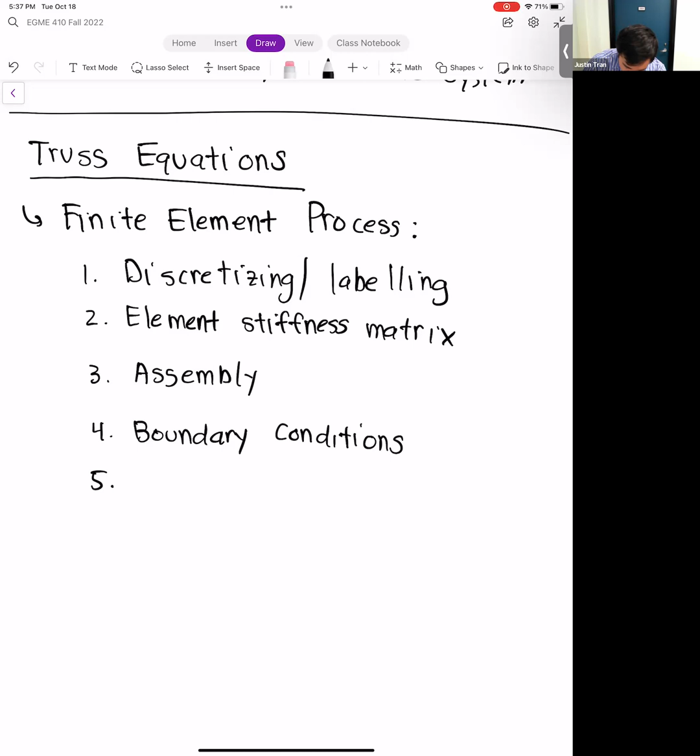Finally, step 5 is we solve. Step 5 is actually the easiest part of this entire journey because you don't actually do it yourself. All you have to do is basically set up the problem — you get the global stiffness matrix, you get the global forcing vector, you feed them into MATLAB, and you let MATLAB do all the hard work for you. MATLAB is going to give you an answer for all the nodal solutions.

Even though we're talking about trusses here, we're still going to be following the same process. The only difference is that in step 2, we're going to be forming the element stiffness matrix for a truss instead of a spring. That's kind of the big difference between most finite element methodologies — how you form the element stiffness matrix based on the type of elements that are available.

Let's go ahead and introduce trusses. A truss is a slender structural element that we assume can only be compressed or stretched.

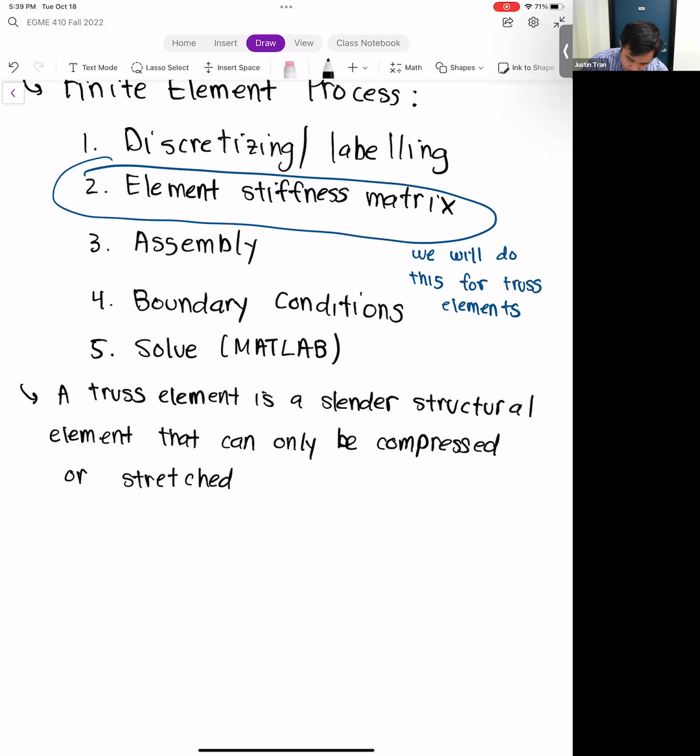And so visually, we kind of represent it as just a thin tube, like this. So this tube here is of length L.

We also know the material for this truss element, and so we also know its Young's modulus, E.

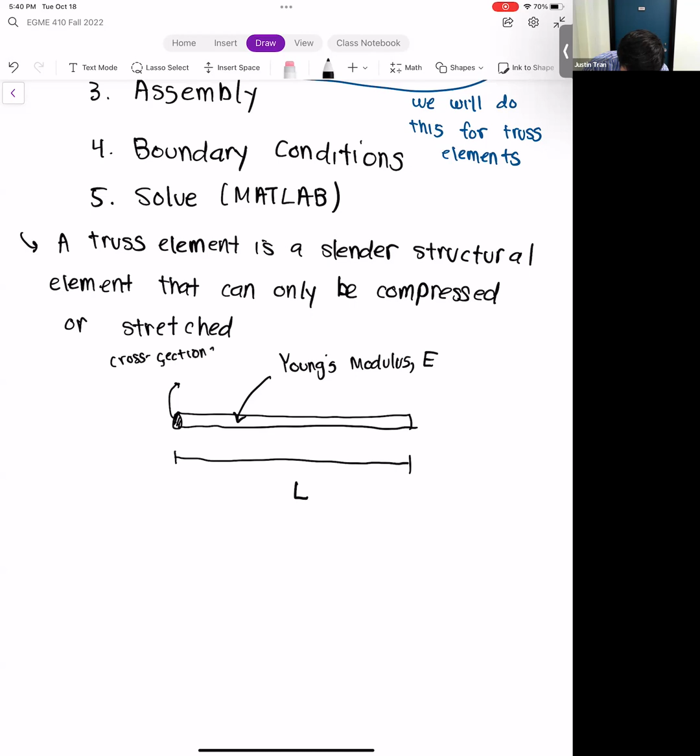And then one thing we'll also know is the cross-sectional area, where the cross-sectional area is A. So those are the three main properties for the truss that we're going to be working with.

And our assumption here has to do with its modes of deformation. We're only going to assume that it can be compressed and stretched. That means the deformation is going to be purely in the axial direction of the truss.

And so when we're characterizing the deformation D1, D2, we're only going to assume that it's down the length of the element. It's either going to be stretching it out or compressing.

I'll go ahead and label these nodes. The node on the left I'll call node 1, and the node on the right I'll call node 2. In addition to the deformation, we also have the forces that are on each node. We'll call that F1, F2. So I'm going to go ahead and write that down.

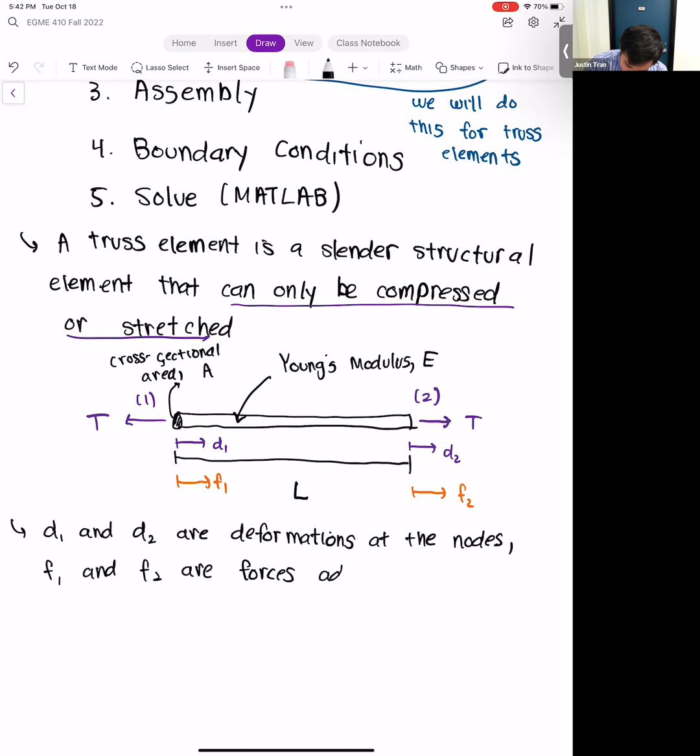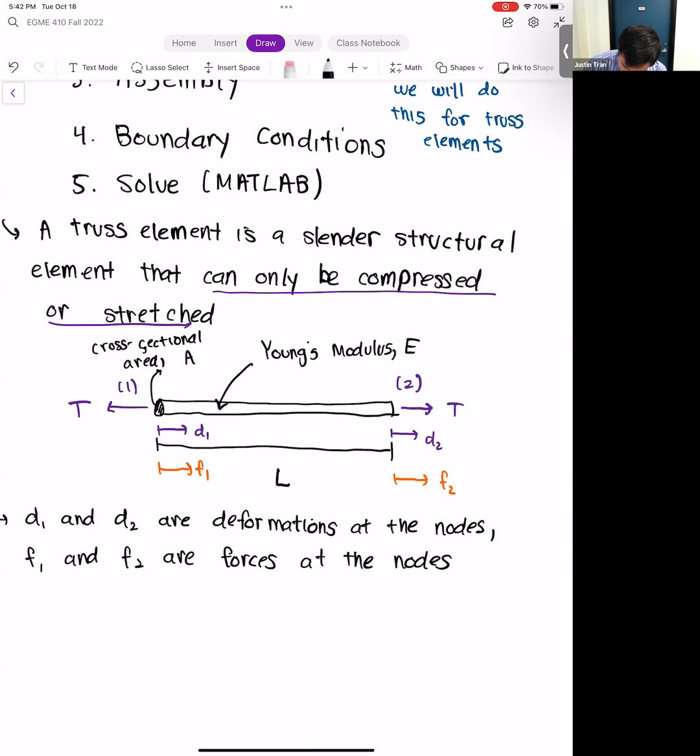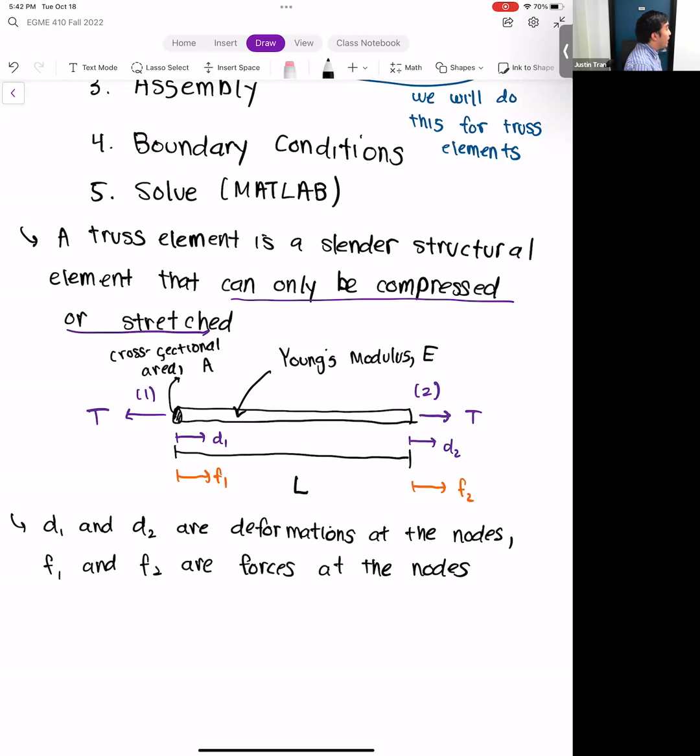We have D1, D2, F1, F2. I drew T in there - I was a little bit premature with that, and we're going to use T in a second. But basically, what we want is a relationship between D1, D2, and F1, F2. And that relationship is going to be our element stiffness matrix.

And so that's basically what we're going to seek to obtain. So, this first part of the class is we're going to obtain the element stiffness matrix for this truss, and then we're going to use that element stiffness matrix in problems. That's kind of the general trend of what we're going to be following over the next couple of weeks.

So, over the next couple of weeks I'm going to be introducing different types of elements. And then from those elements, we're going to form its element stiffness matrix, derive it in some way. And then from the element stiffness matrix, we can then use that to do problems and such.

So this truss element here will be the second type of element that we'll go over in this direct stiffness section. Any questions on this so far?

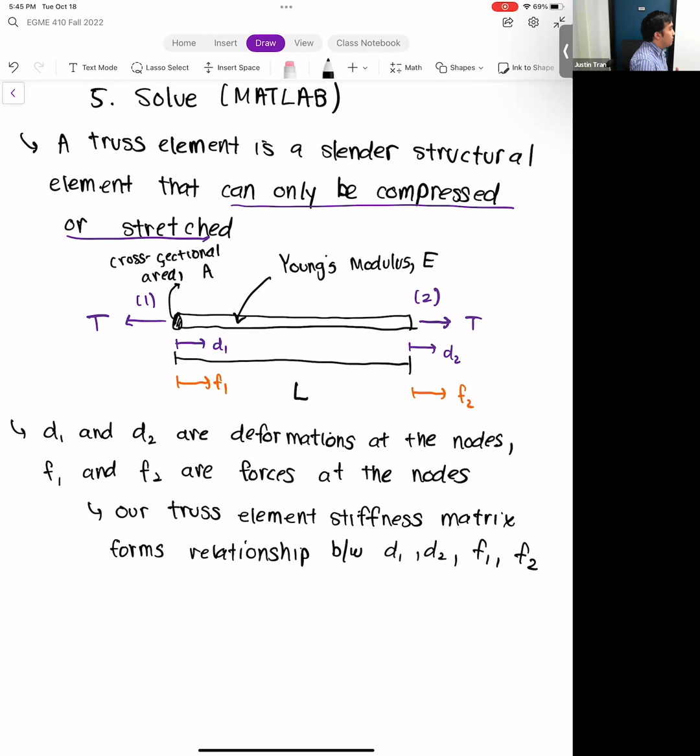So what you should generally expect as we go through this derivation is that the element stiffness matrix for this truss should look very similar to our spring, except we don't have a spring constant - instead we have these other quantities, but you'll see it all kind of make sense. And so just like we did with the spring, we're going to assume that this truss element is in static equilibrium.

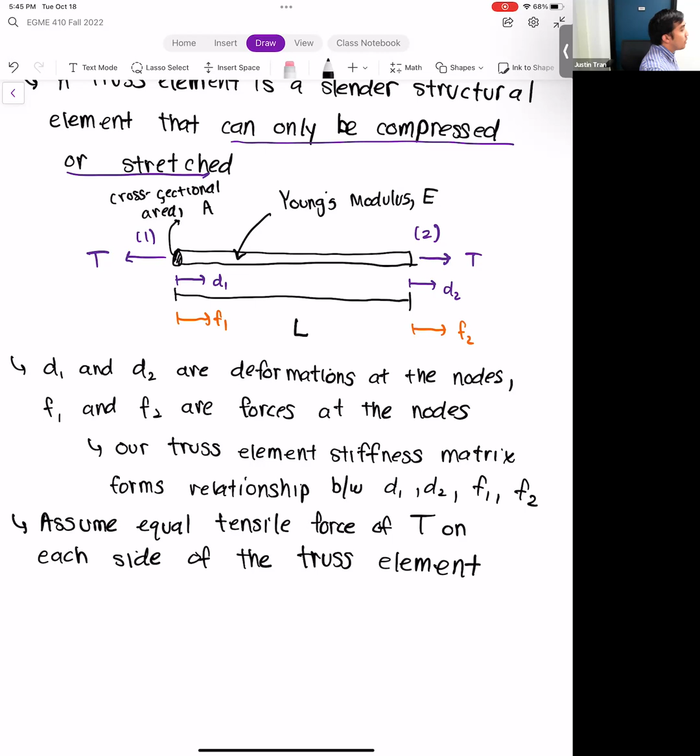And so we're going to assume that we have an equal force of T, a tensile force of T applied on both sides of the truss. We're going to use that to form our relationship between F1, D1, and F2, D2.

So another thing we're going to assume is that we have linear elasticity inside the bar. And so what we know from linear elasticity is that stress is linearly related to strain - this is Hooke's law. So we have stress equals E times strain, where E here is our Young's modulus and epsilon here is our strain. This equation is going to form the basis for our derivation of the element stiffness matrix, because what we're going to do is substitute for each of the terms here, except for E, and put them in terms of the quantities that we know.

Okay, so let's start with sigma. We know that sigma is stress, where stress is nothing more than just a force distributed over an area.

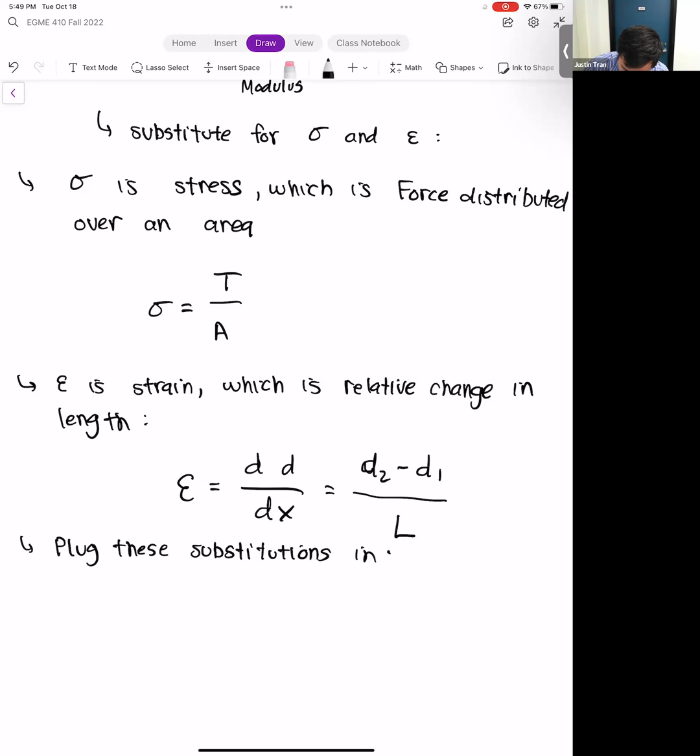On the left-hand side, we have sigma, which is T over A. This is equal to E, the Young's modulus, multiplied by our strain, which is d2 minus d1 divided by L. So all I did was plug in our expressions for sigma and epsilon into our equation there.

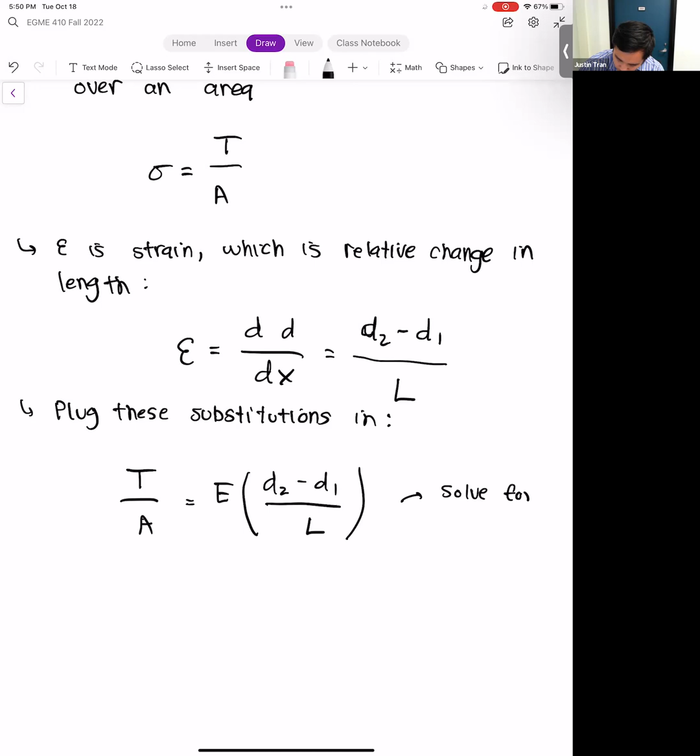And so I'm going to go ahead and simplify this, solving for T. I'm going to isolate T on the left-hand side by multiplying both sides by A. So we have T is equal to A times E divided by L, times D2 minus D1.

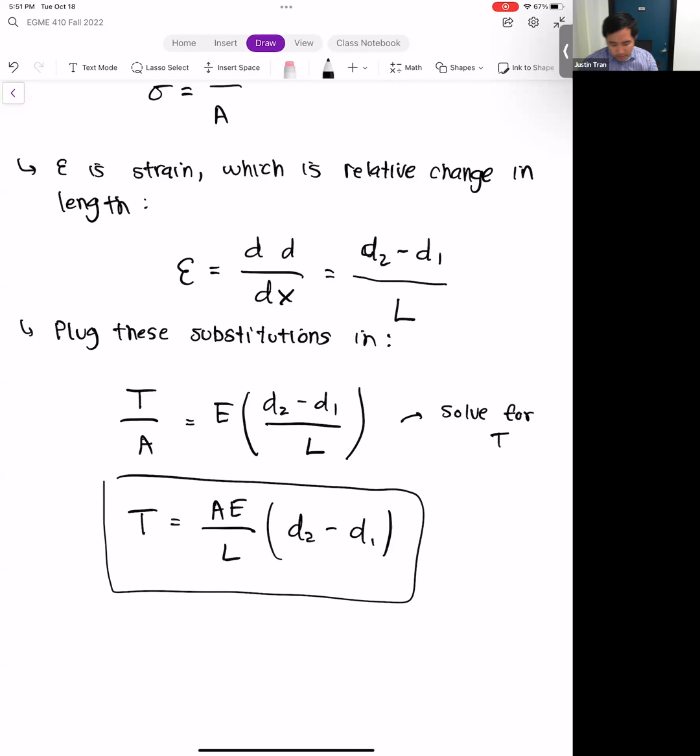So now that we have an expression for T, we know that T here is being applied on both ends of the truss. So let's go ahead and mathematically relate T to F1 and F2.

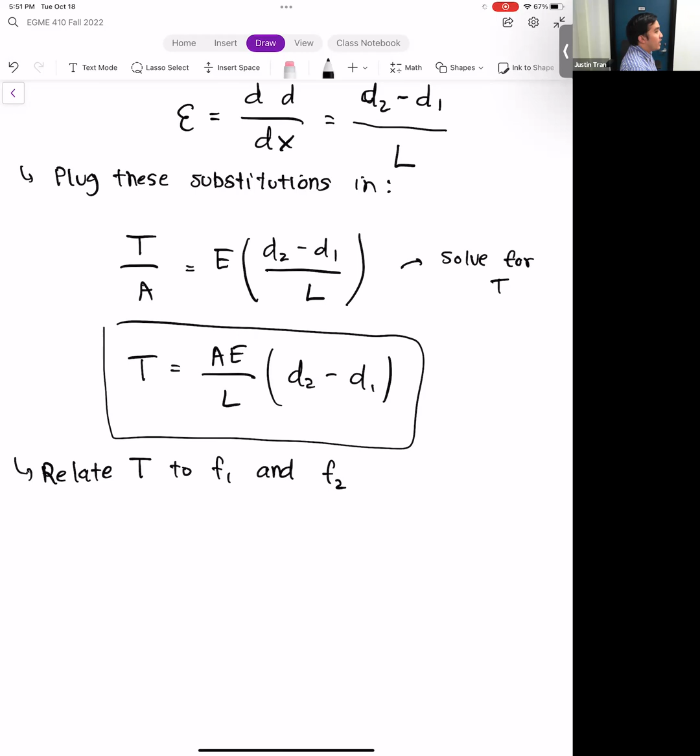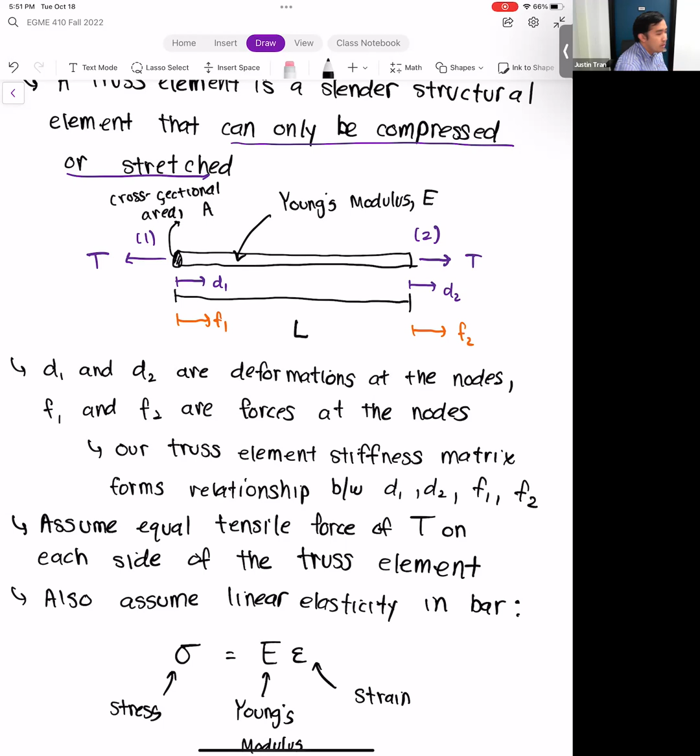All right, so let's go back up to our figure here. We can see that T is being applied to the left-hand side of F1. So T is going to the left on node 1, whereas T is going to the right on node 2. And so what we can do is say that F1 here is going to be equal to

negative T, because the force that's being applied on node 1 has a magnitude of T, but it's going to the left. Whereas the force that's being applied on node 2 is going to be exactly T, so F2 is going to be equal to T.

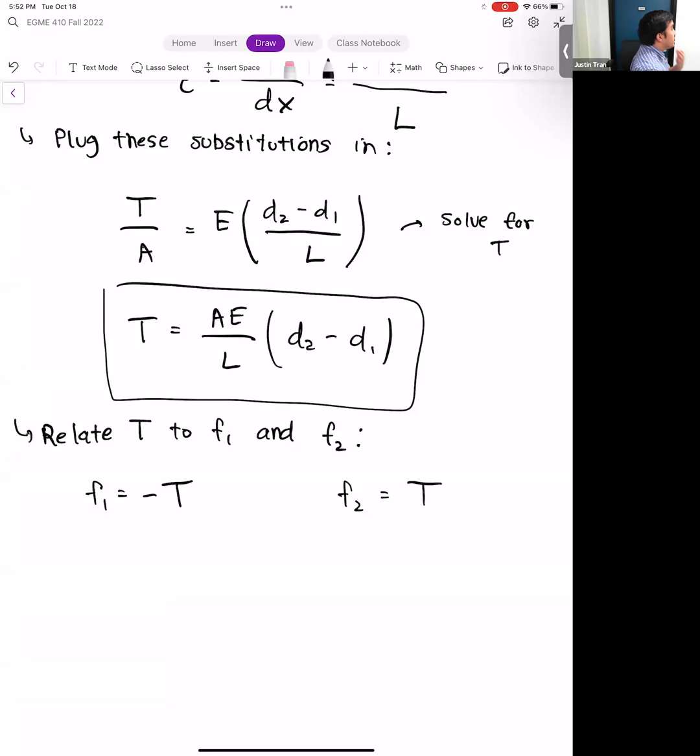So let's go ahead and plug in our expressions for this. We can say that F1 is equal to minus AE over L times D2 minus D1, and F2 is equal to positive AE over L times D2 minus D1. Just for simplicity, I'm going to distribute the negative for F1, and so we have AE over L times D1 minus D2.

For F2, there's nothing really to distribute, so I'm going to leave it as it is. And now that we have these expressions here, we can see that we have equations that have F1, F2, D1, and D2. So let's go ahead and use these two equations to form our stiffness system.

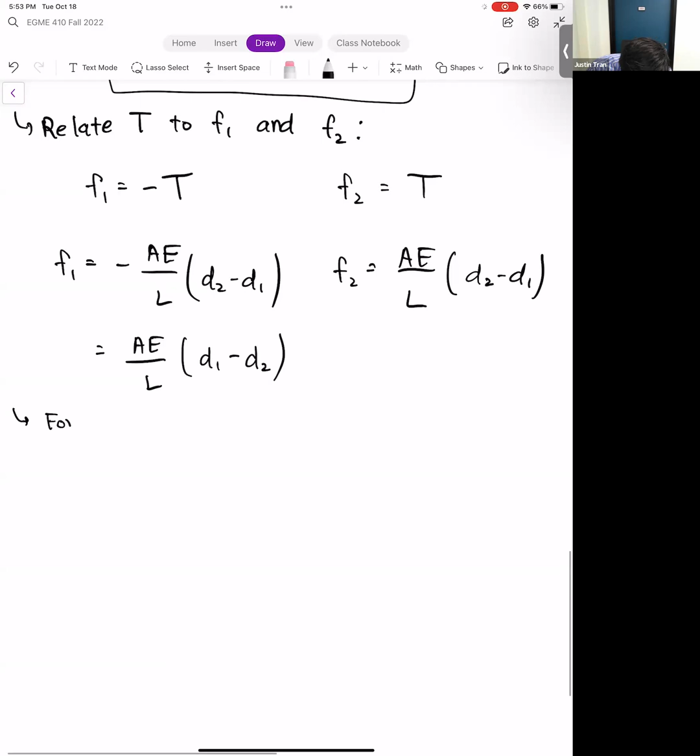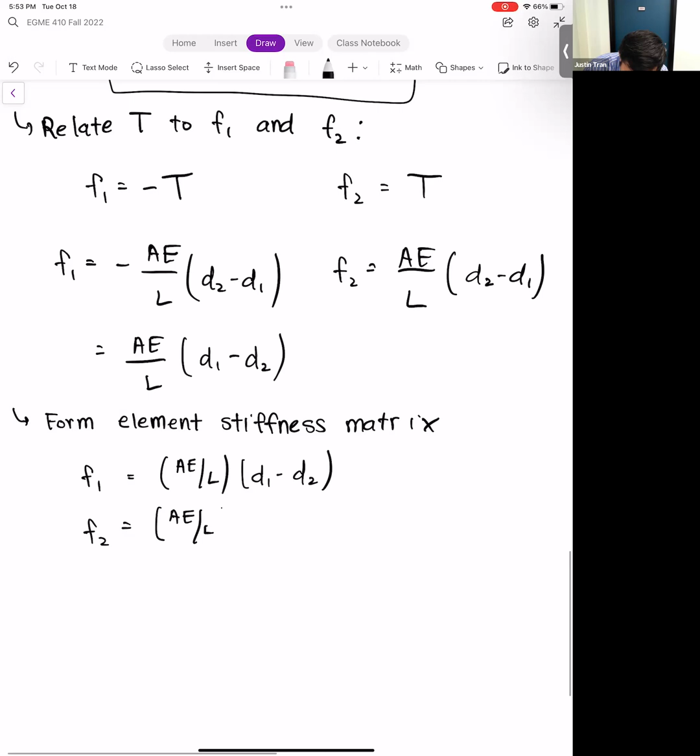So I'm going to say F1 is equal to AE over L times D1 minus D2, and F2 is equal to AE over L times D2 minus D1. Now let me go ahead and put this in matrix form, because what we have is a system of two linear equations and two unknowns.

And so of course we can put this in matrix form. We have F1, F2 is equal to the matrix AE over L, minus AE over L, minus AE over L, AE divided by L, times D1, D2.

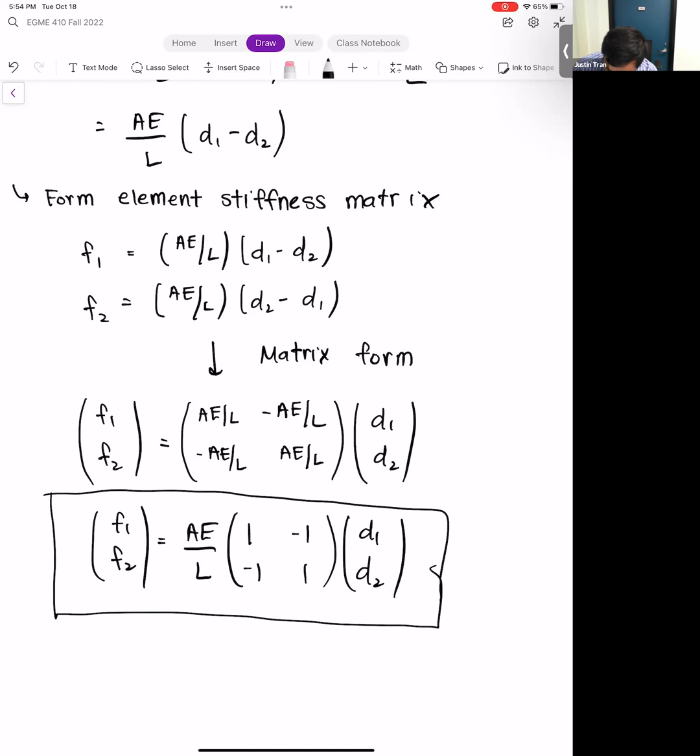We can factor out, just to save our fingers a little bit instead of having to write AE over L so many times, because it's a constant multiplier, we can pull that out of the matrix. So we can say this is equal to AE over L times the matrix 1, minus 1, minus 1, 1, times D1, D2. And there is our stiffness system.

Or this right here, that right there is our element stiffness matrix for a truss.

All right, and so that's it. Okay, and so there's our element stiffness matrix for a truss.

Now that we have that, we can go ahead and start solving problems. We've already gone over the entire direct stiffness system, and the only thing that was unknown to us up to this point was how to form the element stiffness matrix for a truss. But now that we have that, we're ready to start doing some problems.

So the next thing I'm going to do is an example. But before I do that, are there any questions on this? Okay, all right, so let's do an example.

In this example, we're going to have an assembly of 3 truss bars. The truss bars are sandwiched between two fixed walls.

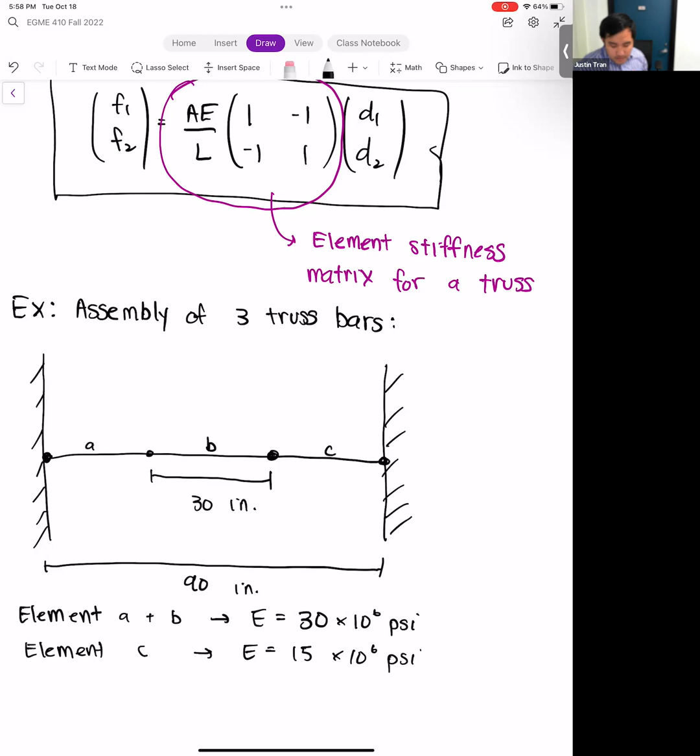We also know the cross-sectional area. For elements A and B, they have a cross-sectional area of 1 inch square. Meanwhile, element C has a cross-sectional area of 4 inch square. So even though element C here has half the Young's modulus, the cross-sectional area is quadruple - we have 4 times the area.

All right, so let me go ahead and label the nodes here. So we have nodes 1, 2, 3, and 4.

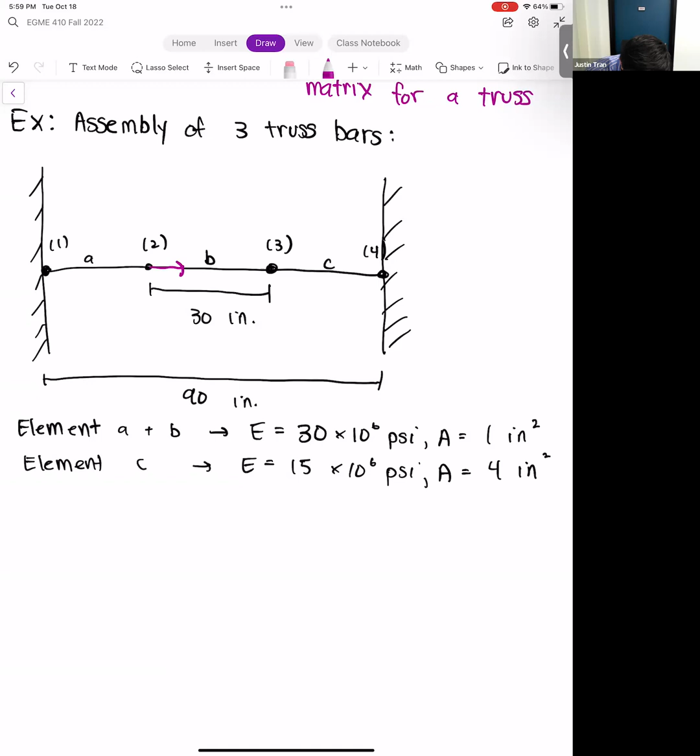And oh, we need a force too. So let's assume that we have somebody grabbing onto the middle of this assembly, and let's assume that we have a force here, and the force is equal to 3,000 pounds.

Before I forget, it may be clear from the figure, but let me just go ahead and label it just to be sure. Because nodes 1 and 4 here are kind of attached to the lateral walls, we're going to assume that nodes 1 and 4 are fixed.

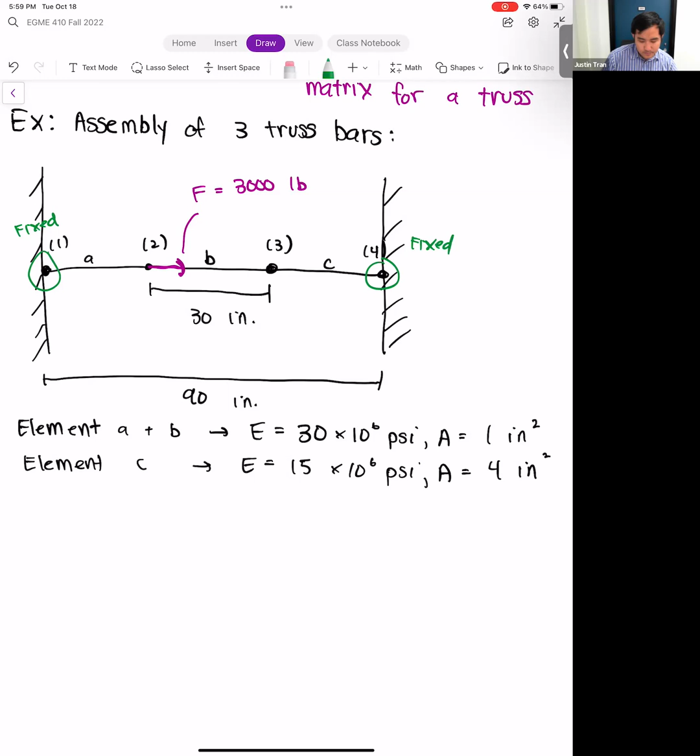Given this problem here, and all of its features, what we want to compute are the nodal displacements at each of the 4 nodes.

And one new thing that I'm going to show you how to compute in this problem too is we're going to compute the reaction forces at the 2 fixed supports.

All right, so we haven't gone over how to do part 2 of this problem, but we'll go over that once we get there. We need the nodal displacements first before we can actually do that. All right, any questions on the setup for the problem?

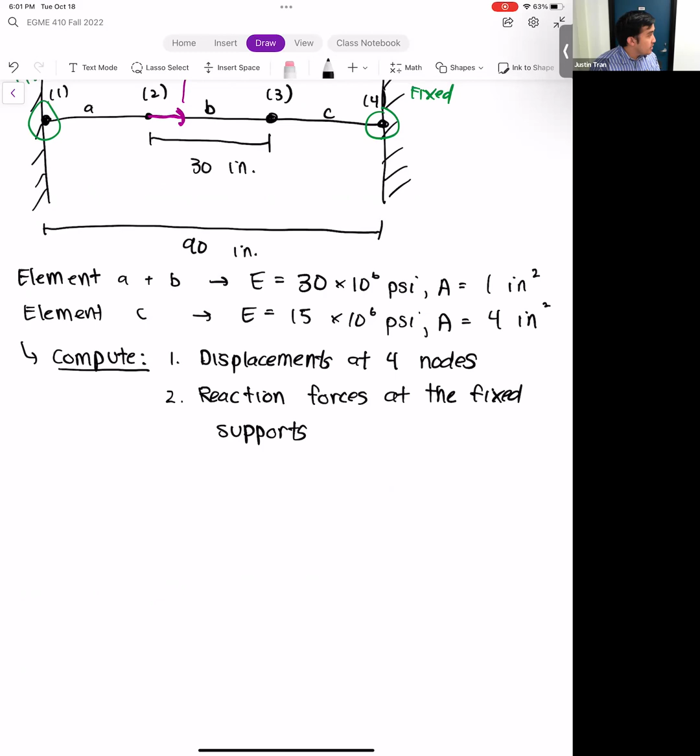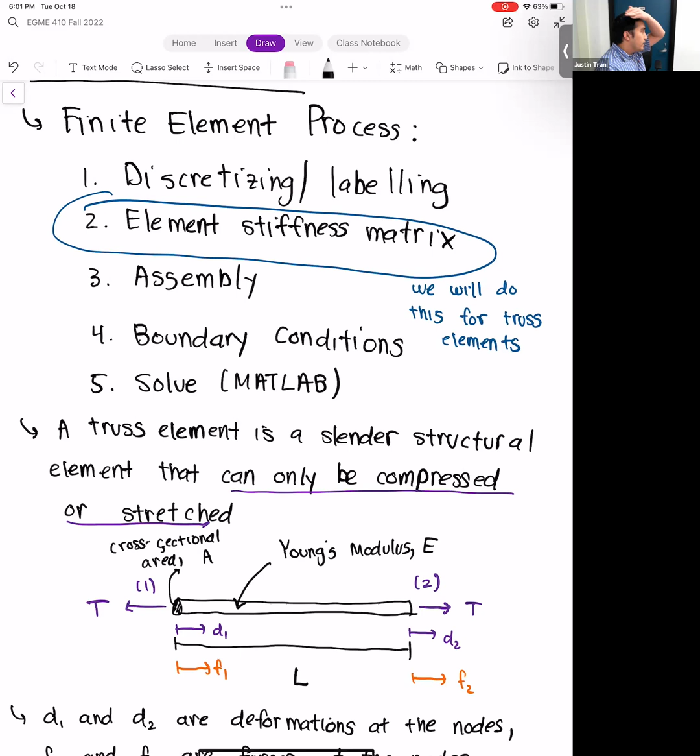We're going to be using the direct stiffness method to solve this, following this exact same recipe that we went over at the beginning. We've already discretized the system and labeled everything, so the next step is to do the element stiffness matrices for each of the elements.

We have 3 elements here, and so that means we're going to have 3 element stiffness matrices. We know for a truss, the element stiffness matrix is AE divided by L times 1 minus 1, minus 1 and 1. So for element A, if we go ahead and compute that, we have AE over L.

AE over L here is going to be 1 inch square, which is the area. E here is 30 times 10 to the 6 psi. And the length here is 30 inch.

So if we do the math here, we know the 30 here is going to cancel out. We know that the AE over L factor for element A is going to be 10 raised to the 6th power.

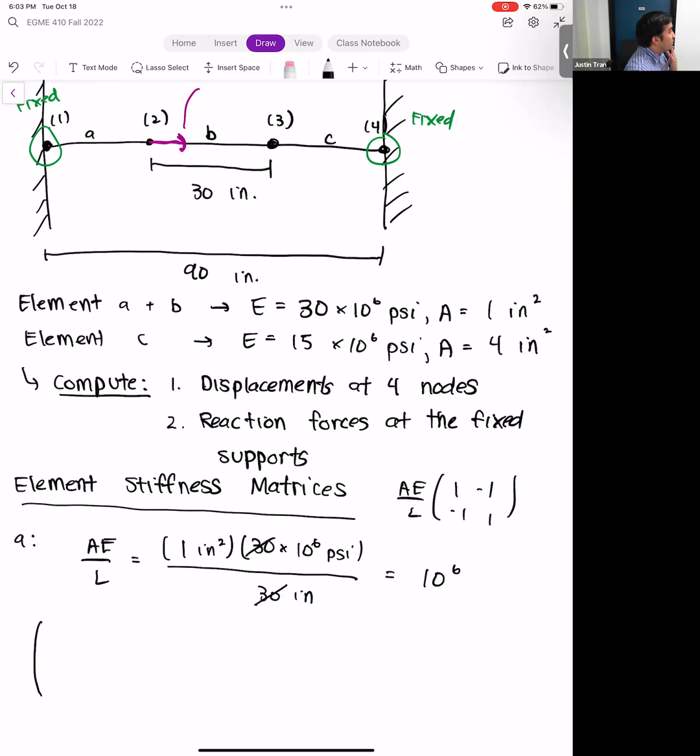So let's go ahead and plug that in. And remember, when you're forming the element stiffness matrices for the elements, you have to note on which node the elements are attached to. In this case, element A here is attached to nodes 1 and 2, so this is going to be F1, F2.

It's going to be multiplied by 10 to the 6th, 1 minus 1, minus 1, 1. And then we multiply it by the nodal displacements D1 and D2. So our total element stiffness system for element A is going to be F1, F2 equal to 10 to the 6th times 1 minus 1, minus 1, 1, multiplied by D1, D2.

Question? Yeah. Yeah, great question. So the units for this, PSI here is pounds per square inch.

The inch square is going to cancel out, and so the units for this is pound per inch. That's generally the units for the stiffness matrix, so it's going to be some force divided by a distance. Same units as a spring constant.

Okay, so that's element A. Let's go ahead and repeat the process for element B. Element B has identical AE over L, so I'm not going to write the formula for it again. For element B, we know that the AE over L is going to be 10 to the 6th pound per inch.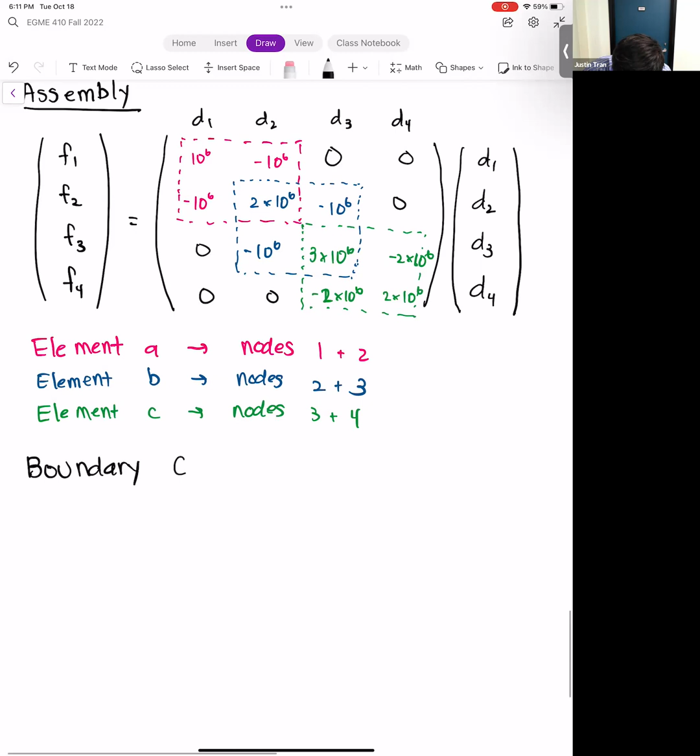Right, so remember boundary conditions, we're going to modify our assembled system in order to make it solvable. Because if you try to plug in that system right now into MATLAB, first of all, you don't have any values for F1 through F4, and so you can't solve it yet.

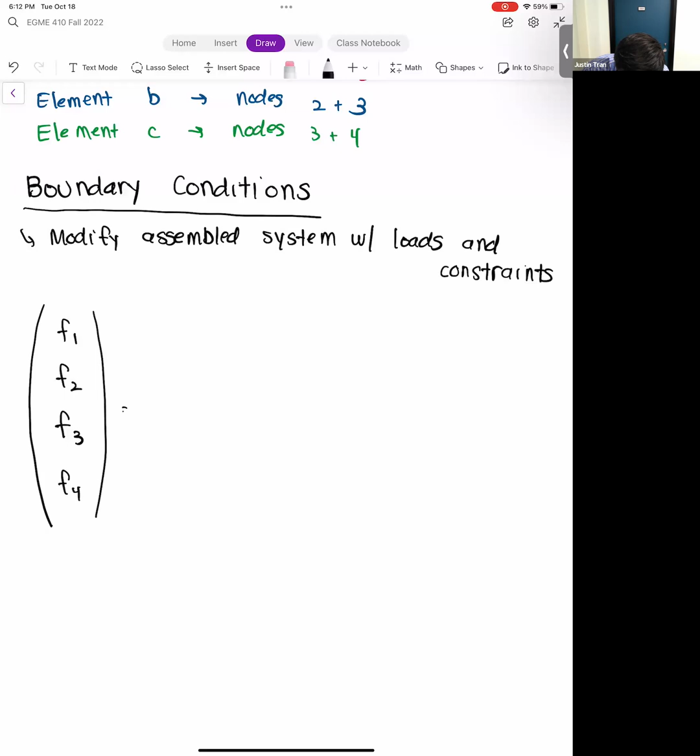So just for simplicity, I'm going to go ahead and write the system out again. So we have F1, F2, F3, F4, and D1, D2, D3, D4.

And then the entries in the matrix, we have 10 to the 6th, minus 10 to the 6th, minus 10 to the 6th, 2 times 10 to the 6th, minus 10 to the 6th, minus 10 to the 6th, 3 times 10 to the 6th, minus 2 times 10 to the 6th, minus 2 times 10 to the 6th, and 2 times 10 to the 6th. Everything else is zeros, but we're going to overwrite some of this anyway, so I'm just going to leave them blank for now.

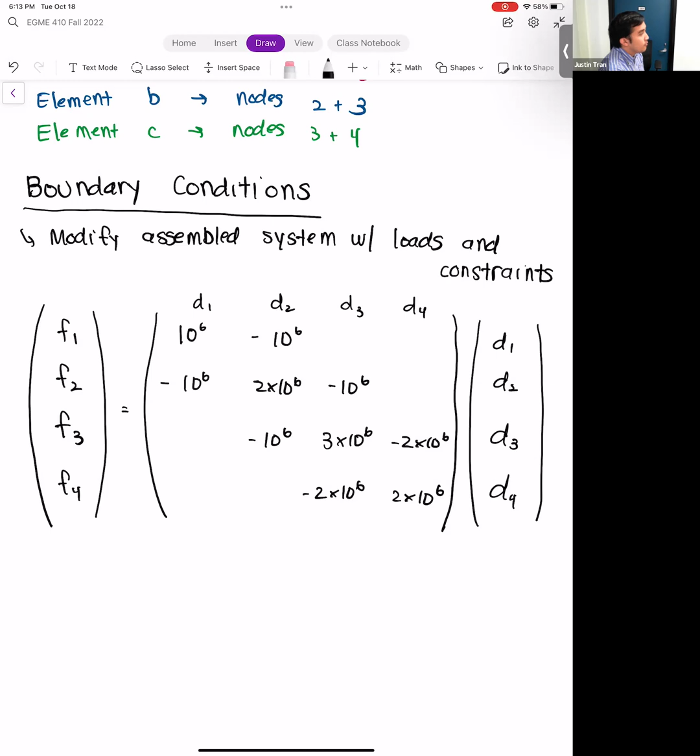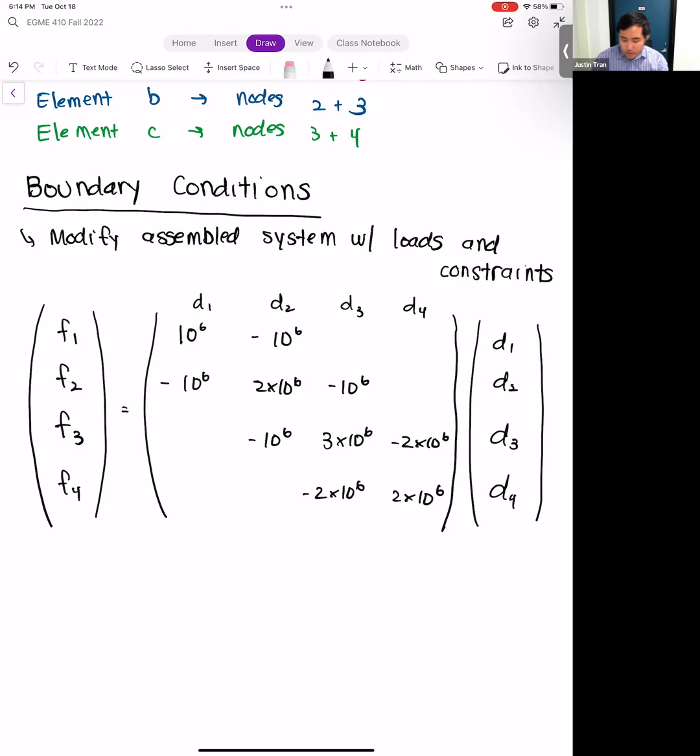Okay, and so we have 3 boundary conditions that we need to apply here. And so we have 2 fixed constraints. Those are fixed constraints on nodes 1 and 4, and we're going to apply those. We'll probably do those ones first.

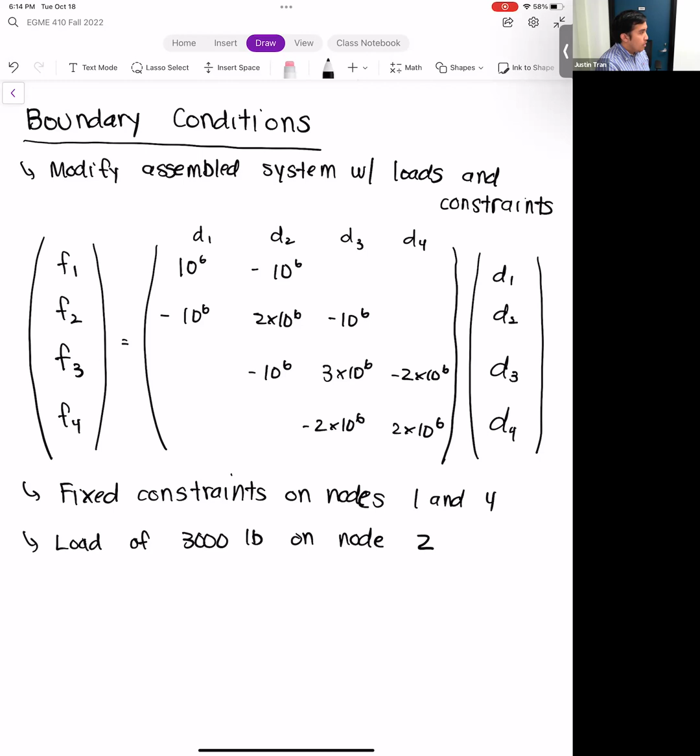Okay, and then we also have a load of 3,000 pounds, which is being applied on node 2. All right, so let's start with the constraints.

And so remember, the way that we deal with constraints is that we go to the rows on which the constraint is being applied, and we replace those entire rows.

So we're going to replace row 1 and row 4. Okay, and those are going to be our fixed constraints.

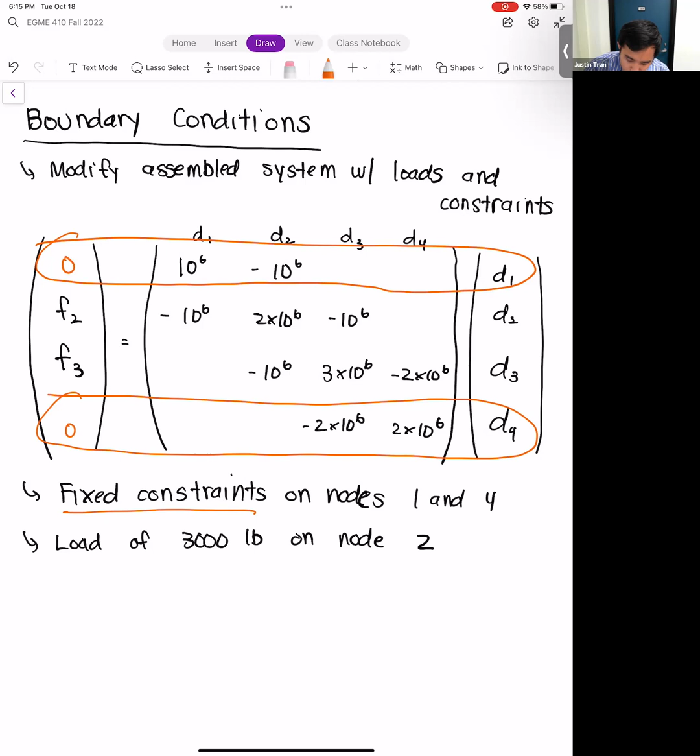And so if you recall, the way that we do this is that we set the forcing values in those rows equal to 0. We put a 1 on the diagonal entry, so whatever the diagonal is for that row, we're going to put a 1 there. And so for the first row, the diagonal entry is the first column, and for the 4th row, the diagonal entry is the 4th column.

And then everything else on that row is going to be zeros. So we have 1, 0, 0, 0 for the first row and 0, 0, 0, 1 for the last row.

Okay, and then the last thing that we need to do before we can solve this is replace F2, F3 with their appropriate load values. And so if we look back on the problem, F2, or the force that's being applied on node 2, is 3,000 pounds. So we're going to erase F2 here and replace it with 3,000.

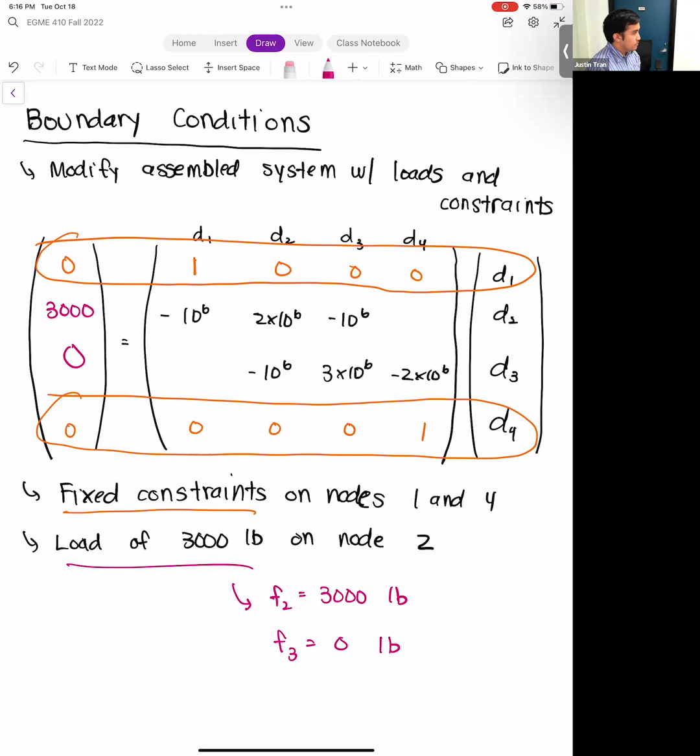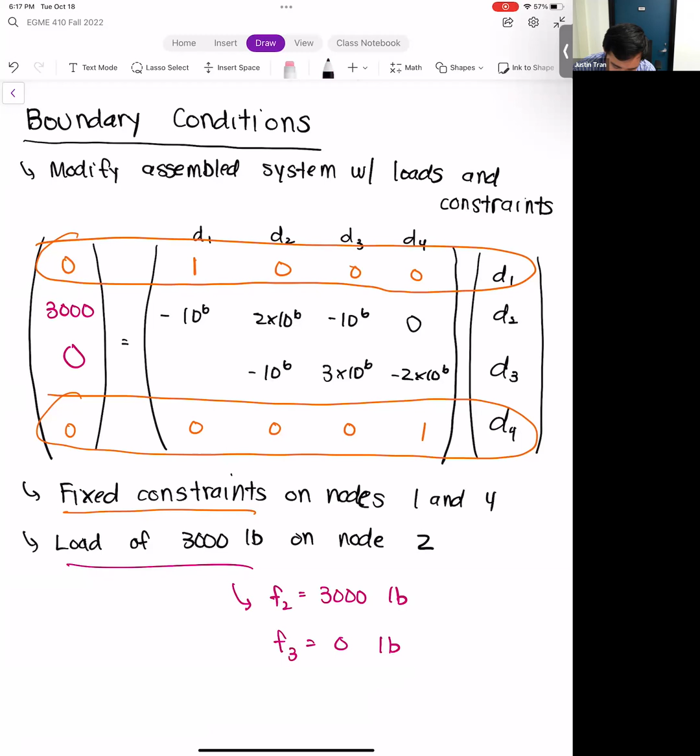And then we're going to erase F3 and replace F3 with 0, because there's no force being applied on node 3. So let me go ahead and fill in the rest of the zeros, we have a 0 here, a 0 here. Now this system here is ready for MATLAB because we've assembled our system and applied the boundary conditions.

And now we're ready to solve this in MATLAB.

So before we do that, are there any questions on how we apply the boundary conditions here?

Remember, the diagonal entry is just whichever column is matching that row number. For constraints, we put a 1 on that entry, whichever column matches that row number. So for row 1, that's column 1, and for row 4, it's column 4.

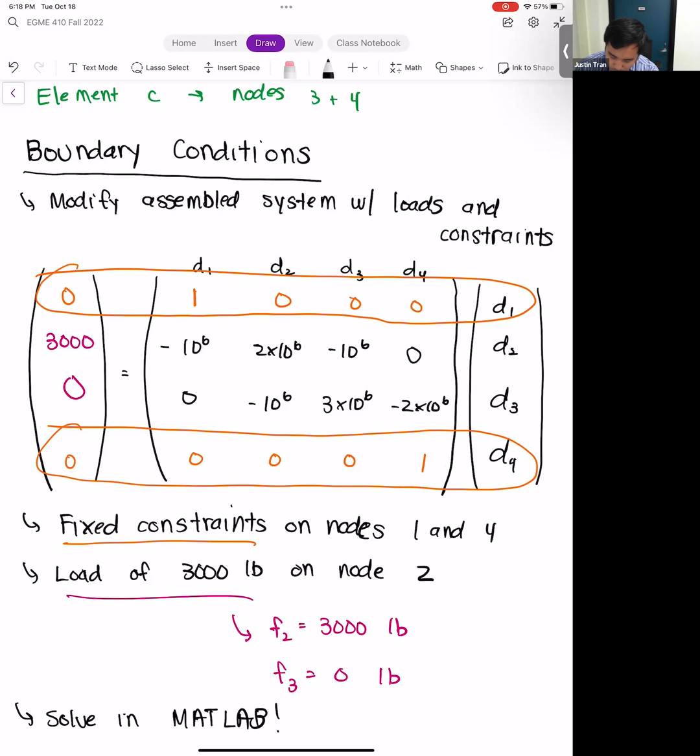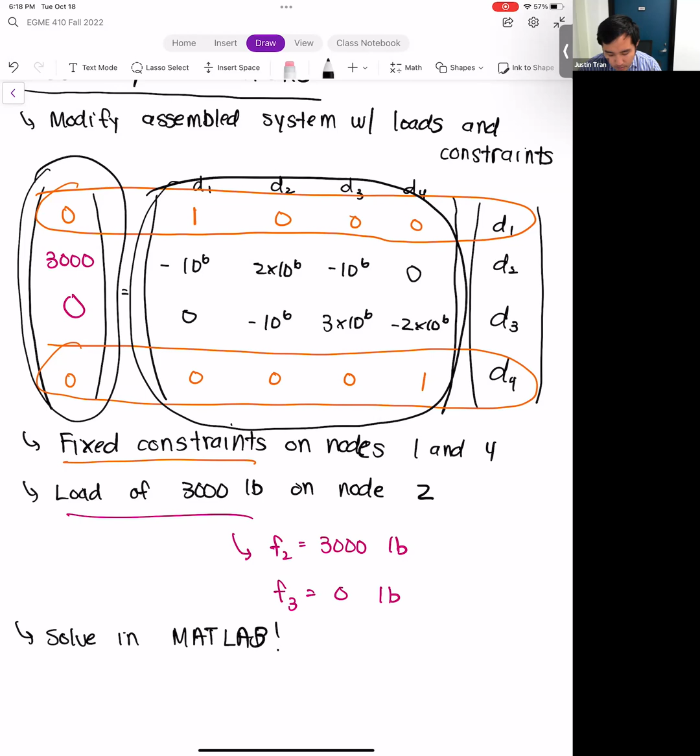Now that we have the system the way it is, let's plug it into MATLAB. I'll skip that step since I don't want to switch to my computer. Remember, we put this into MATLAB by defining two variables: the first is our stiffness matrix, a 4x4 matrix where the entries are given by the following, and the second is the forcing vector, which is all of these. If we use the magical backslash, then we get the following.

D1 is equal to 0 inches. D2 is 0.0018 inches. D3 here is 0.0006 inches. And D4 here is 0 inches.

So that's our solution. We've gone through the whole process again of the direct stiffness method, except now we've done it with trusses, and not much has really changed. The only thing that changed is that instead of our element stiffness matrix being comprised of spring constants, we have the truss parameters: the area, the Young's modulus, and the length of the element.

Any questions on this example here? Okay, and so that's part 1 of the problem.

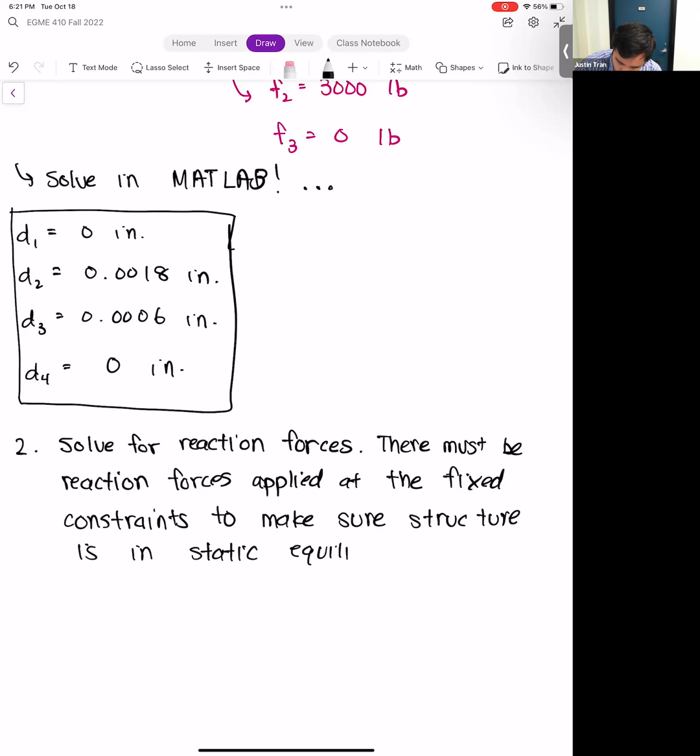Right, because the only finite element situations we've seen so far all involve static situations. Whenever you have a force like we have here of 3,000 pounds being applied on a structure, there must be equal and opposite forces being applied by the constraints to make sure the structure doesn't go into rigid deformation. This means that everywhere we have a fixed support, there has to also be a reaction force at those places. For this particular problem, our fixed supports are located on nodes 1 and 4, so we should solve for F1 and F4 that'll keep this structure in static equilibrium.

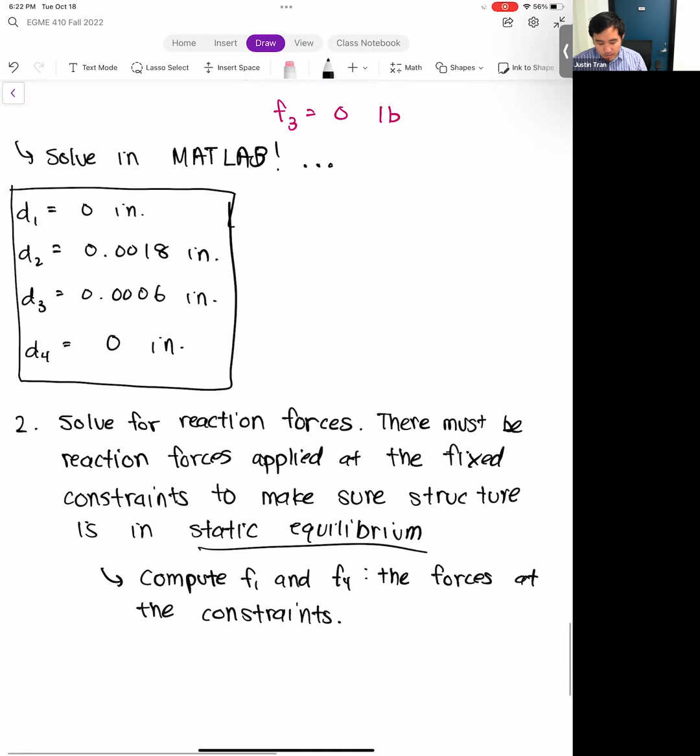And so to do this, it's actually simpler than you think. We don't have to do any free body diagrams or anything like that. What we can actually do is utilize the solution that we already have and a global stiffness matrix that we've already computed.

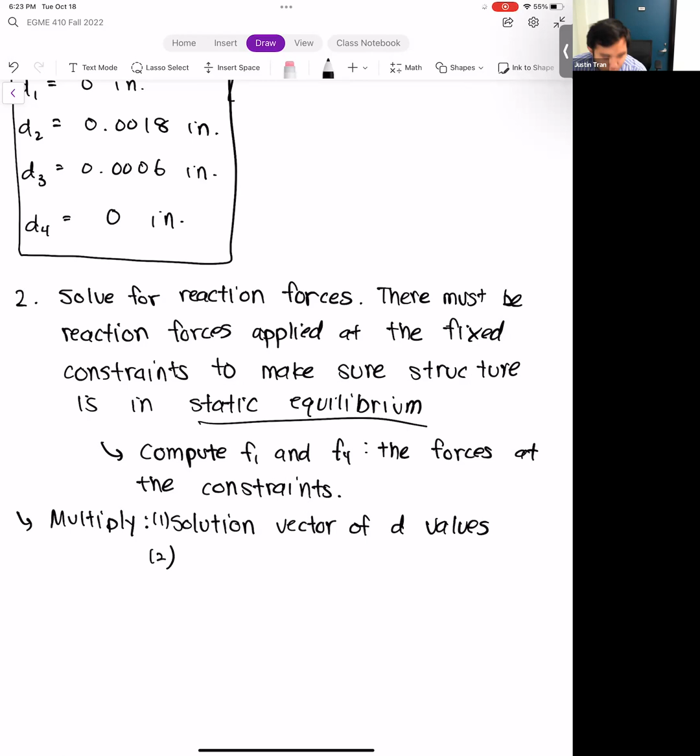All you have to do is multiply two things together: one is a matrix and the other is a vector. The first thing you're going to multiply is the solution vector that you just solved for—the values for D1, D2, D3, and D4, which we just solved for.

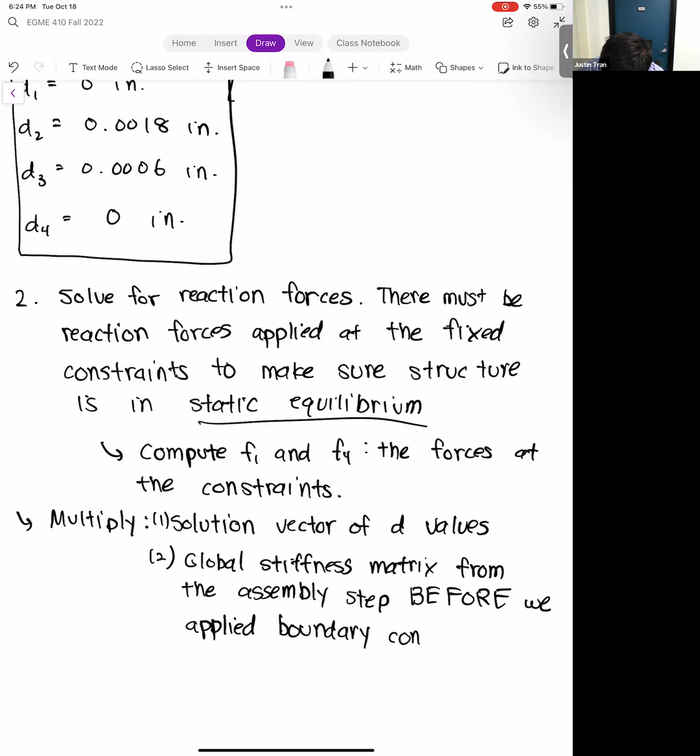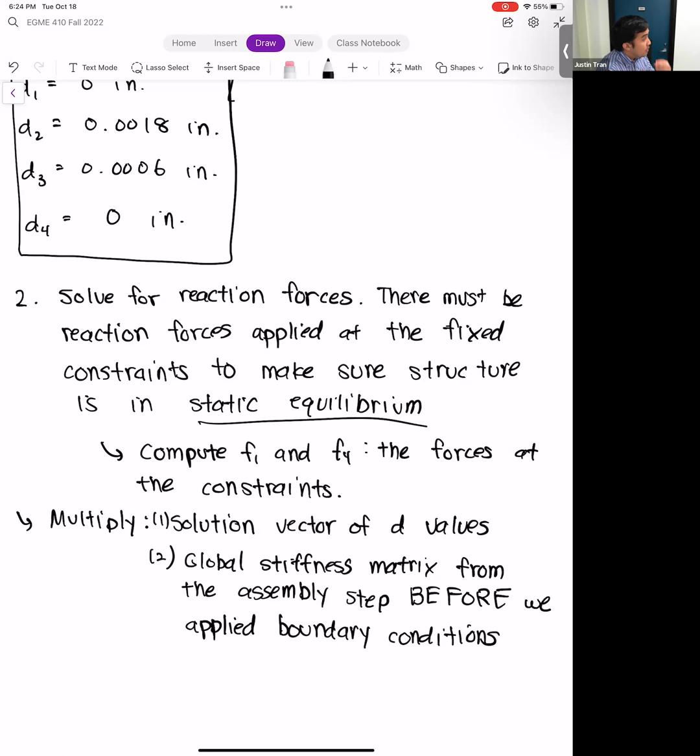The other thing you're going to multiply is the global stiffness matrix from the assembly step. This is pretty crucial—this is going to be before we apply the boundary conditions. If you remember, when going through our direct stiffness process, we had a global stiffness system where after we assembled all the element stiffness matrices, we then modified that system according to the boundary conditions. So what you want is that global stiffness matrix before you apply the boundary conditions, and you're going to multiply those two things.

If you look back into your notes, this is the global stiffness system we had before we applied boundary conditions. Notice that it's symmetric, so you should get a symmetric system here.

And then what we're going to do is we're going to multiply this by our solution. If we look back up here, our solution is the following: for D2, we had 0.0018, for D3 we had 0.0006, and D4 is 0.

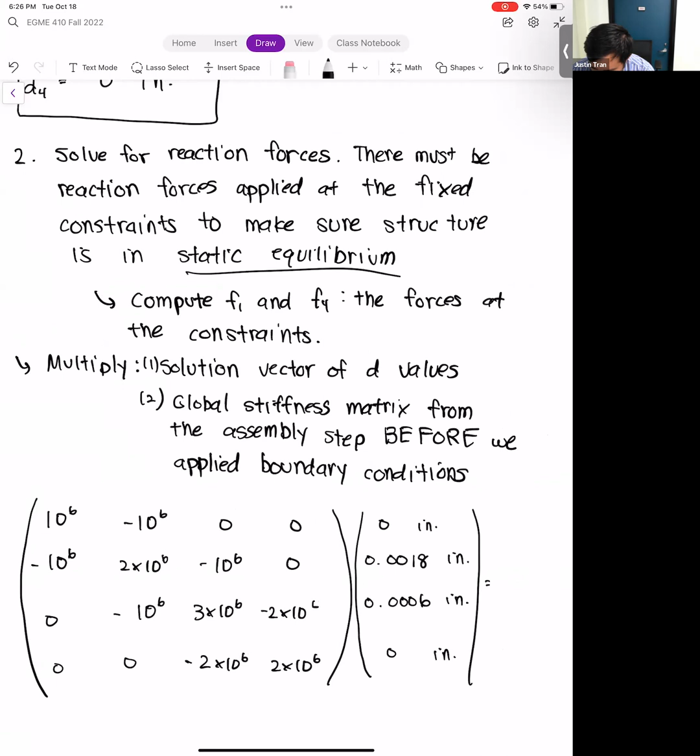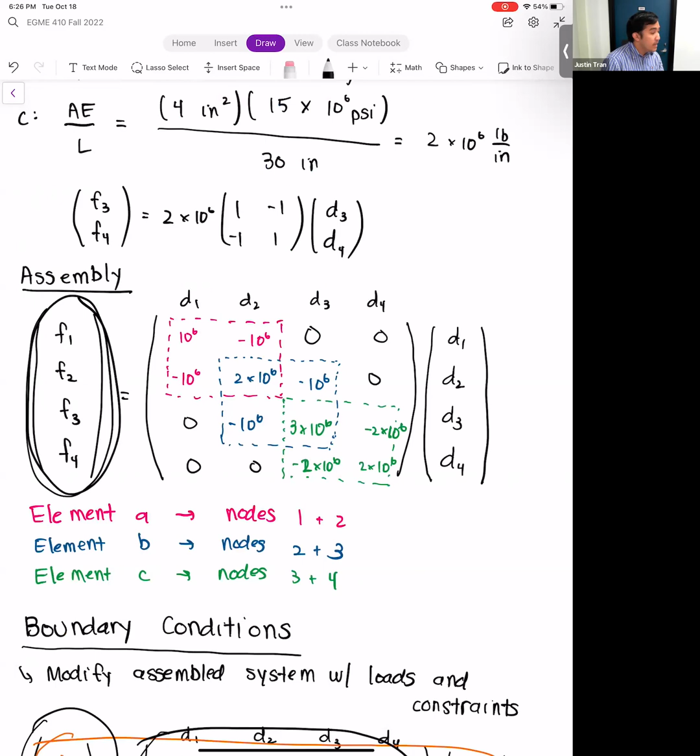All right, so why are we doing this? If you go back to our stiffness system before we apply the boundary conditions, you can see that these things are exactly F1, F2, F3, and F4. And since we've already solved for D1 through D4, all we have to do is go back to that system, and this can give us F1, F2, F3, and F4.

All we have to do here is perform the matrix vector multiplication. Of course you're welcome to do this by hand. It's not as bad as solving a system of linear equations, but it can still be quite tedious. If you know how to multiply matrices and vectors in MATLAB, that's going to help you out tremendously here. So if you do that, then what we get is F1.

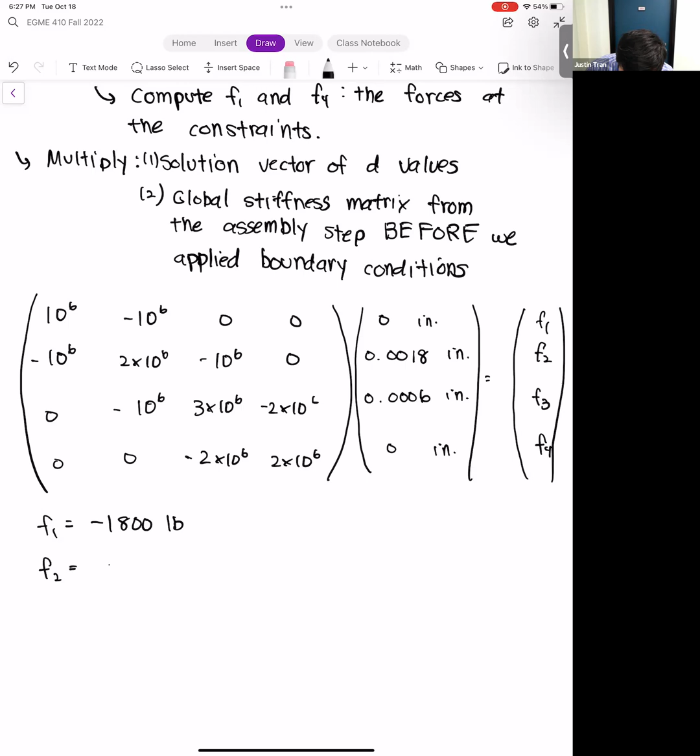F1 here is minus 1,800 pounds. F2 is still 3,000 pounds. F3 is 0 pounds. And F4 here is minus 1,200 pounds.

And so if you want to check your answer here, you can make sure that if you sum up all the forces, they equal 0. So we take minus 1,800 plus 3,000 minus 1,200, and that equals 0, which is good.

Another way you can check your answer is that you actually get forces at places where you have the fixed constraints. Remember, we had the fixed constraints on nodes 1 and 4, and you can see we have forces there now. The applied loads are still the same, so we still have our applied load of 3,000. And F3 here is still 0 because we neither have a load nor a constraint on that node, so there should be no force applied there at all.

All right, any questions on this?

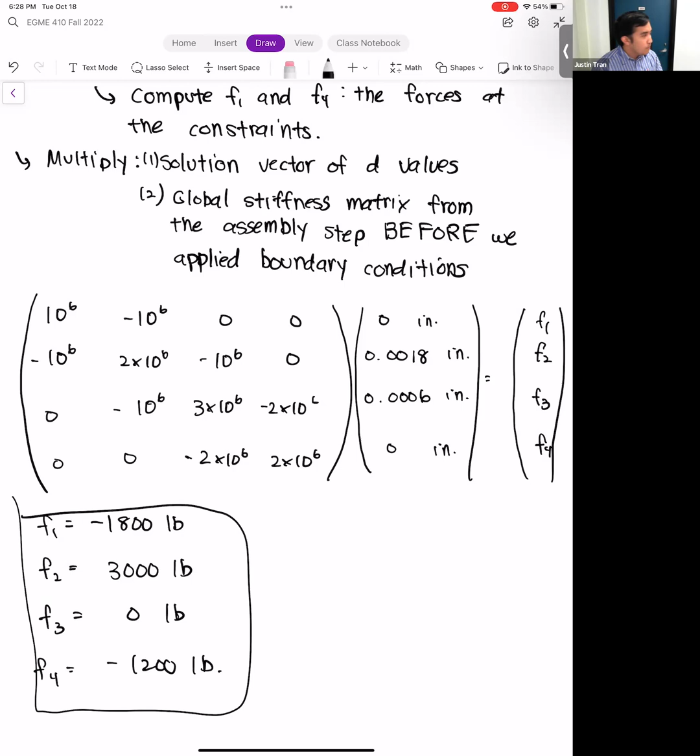So finding reaction forces is pretty straightforward. You just have to take your solution and plug it back in elsewhere. For truss problems in 1D, there's really not much more to that, so that's the only example I have, just because it's basically the same as springs.

But now that we're done with 1D, we're ready to move on to the second dimension, which is 2D. So let's go over how to do truss and spring problems in 2D.

You might be wondering, why are we bothering to go to 2D? Well, it would be very simple and great if our entire world consisted of just 1D stuff. It would be a lot more boring, but a lot simpler. Unfortunately, we don't live in that world. We live in a three-dimensional world. So to do more complicated problems, of course, you're going to have to go up in dimension. And what you'll see is that going up in dimension actually adds a fair bit of complexity to the problem.

I don't know if they do that here—I haven't sat in on a physics class or anything—but I remember when I was in college, in mechanics or electromagnetism or whatever, they'd teach us the 1D theory, and then the professor would kind of wave their hand and say, oh, you can extend this to 2D and 3D, it's easy, it's just the same thing. I don't know if they do that here, but I know that was always the case. I know for sure that when you go from 1D to 2D, it is not the same thing, and it's very different, and it's a lot harder. I think we should respect that fact.

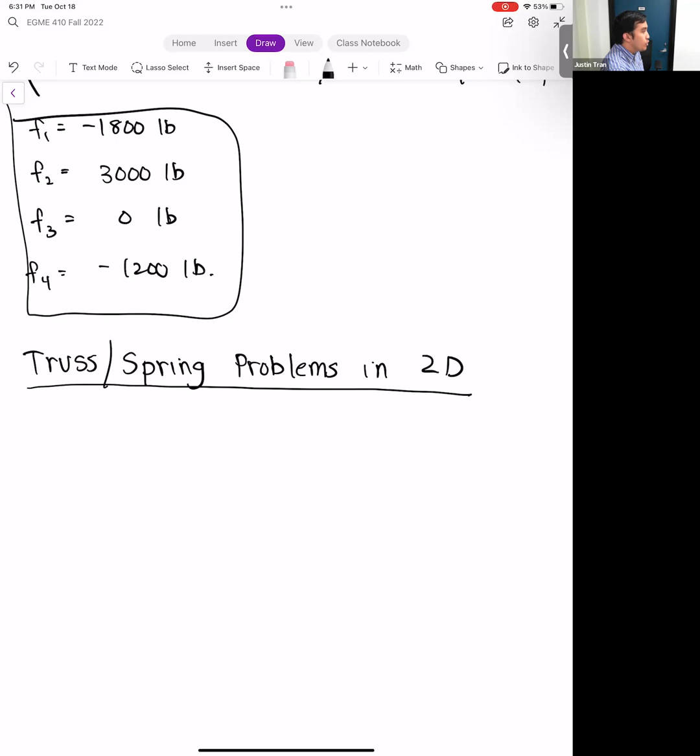I think it's important for you guys to see that because underneath the hood, when you're doing ANSYS, it's doing a lot of these things. So it's good to know what ANSYS has to do in 2D and 3D, and so I don't leave you with a false impression that finite elements is easy. There is a lot of complication that goes into multiple dimensions. We're not going to go to 3D because at that point it becomes majorly tedious without much benefit, but going from 1D to 2D gives you a good look at what you need to do to extend FEA to multiple dimensions.

This is a discussion that we'll probably start today, and then pick up the details on Thursday. But first I want to start off by introducing different coordinate systems, because the way that we're going to apply things in 2D is that we are going to have to rotate our coordinate systems quite a bit.

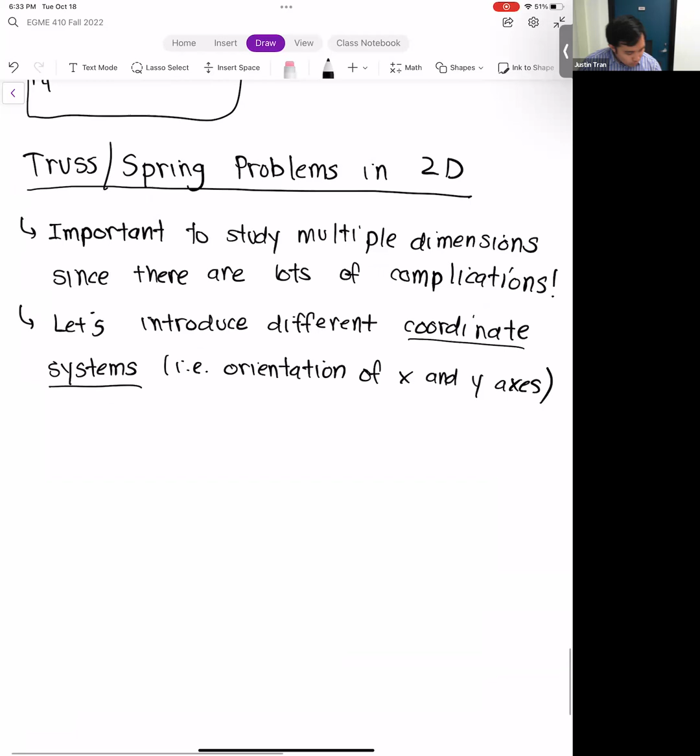The first coordinate system that I'm going to introduce is what's called a stationary coordinate system. You can think of this as our standard X and Y. The stationary X direction is just horizontal, from left to right, and the stationary Y direction is perfectly vertical, from bottom to top. I call these the stationary coordinate system because it doesn't move, and they're going to serve as our point of reference for all the other coordinate systems.

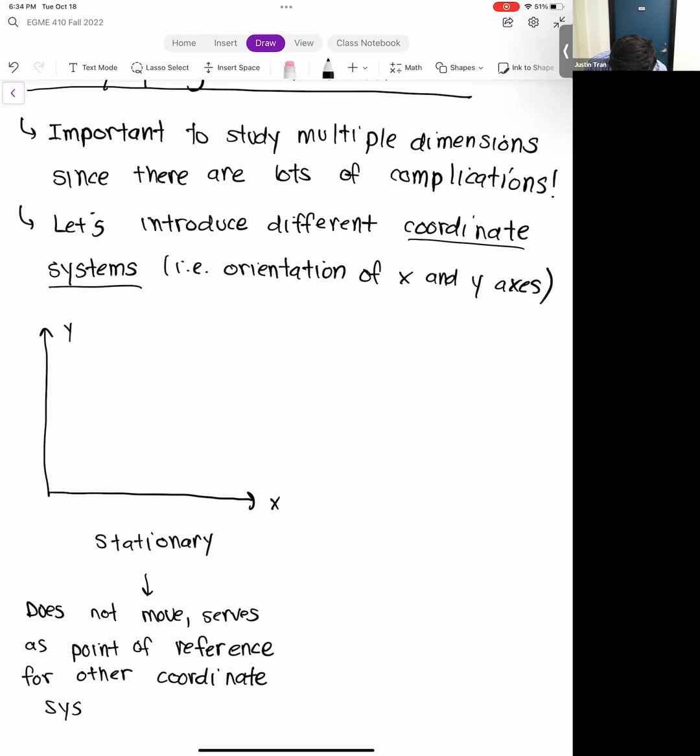Besides the stationary coordinate system, we can also have what's called local coordinate systems. Local coordinate systems are oriented to be parallel to a specific element.

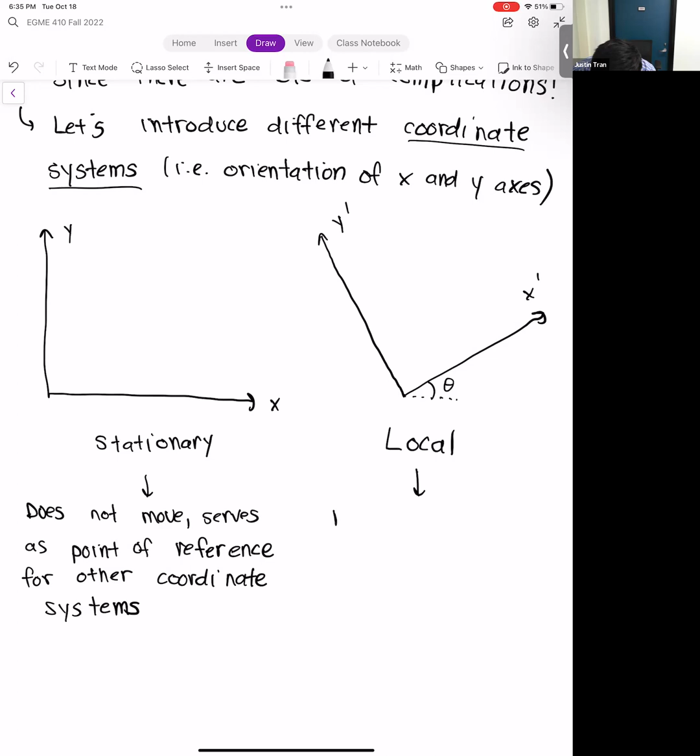For instance, let's say we have a 2D situation where we have a truss element that's going up diagonally, from the bottom left to the top right. We might have a system like this, where we have an element that's oriented like this. So what we can do is orient our coordinate system to be in line with that element.

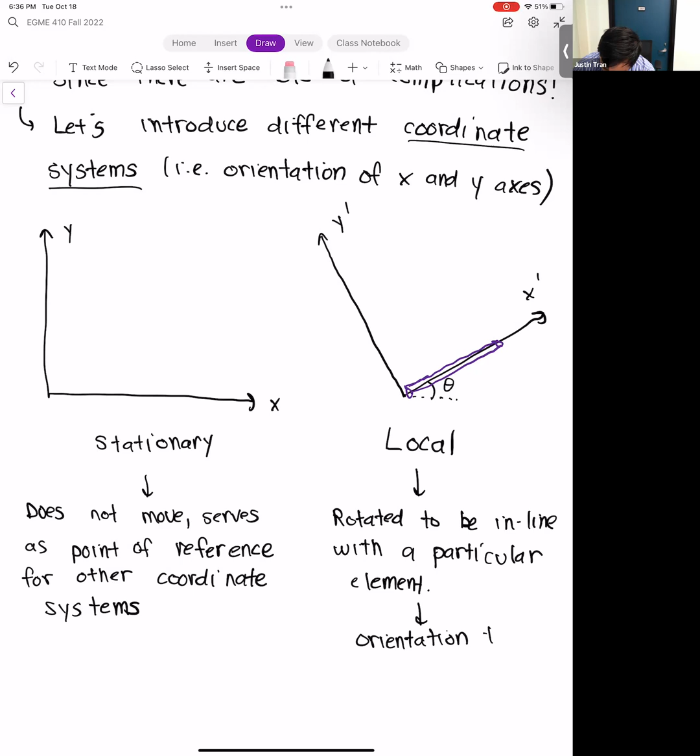The way that we're going to track the rotations here is through that angle theta, which you may have already written down on your sheet. That angle, very important, is going to be measured relative to the stationary x-axis. So it's the angle between the stationary x-axis and the local x-axis.

Conversely, this is also going to be the angle between the stationary y-axis and the local y-axis as well. So one thing you can draw here is a vertical line, and this angle is also going to be theta.

We're talking just pure rotations here, so we're not going to do any kind of coordinate axes translations. We're just rotating the local axis relative to the stationary, and the defining characteristic will be that angle theta.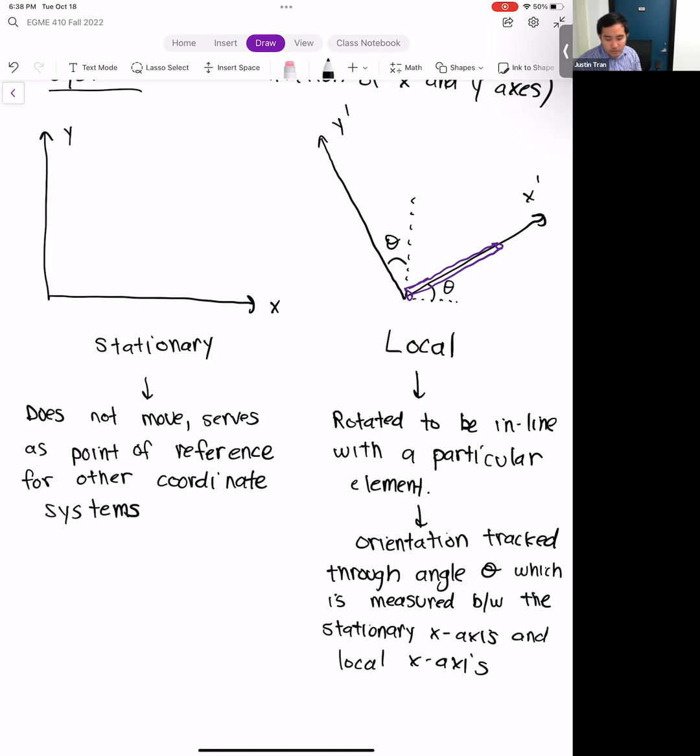Our goal here is to form a relationship between these two systems, because even though we have different systems, they still both exist. So what we can do is use both systems and define the same vector - we can define that same vector in one system, and we can define that same vector in the other system as well. So what we want is a mathematical relationship that maps between the two coordinate systems.

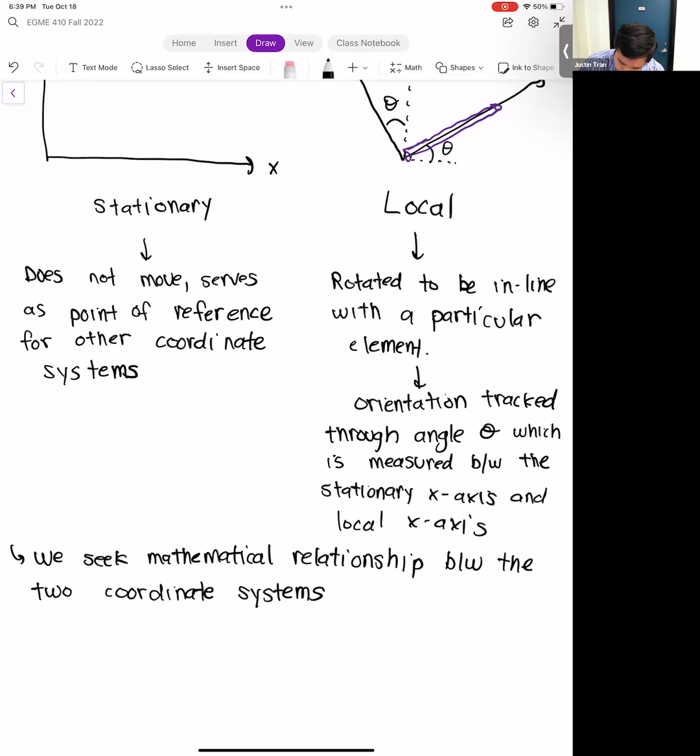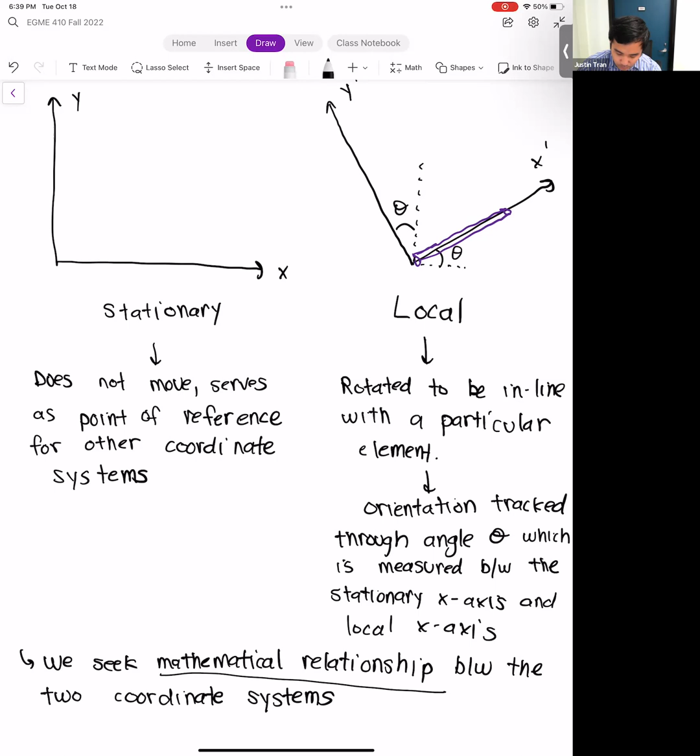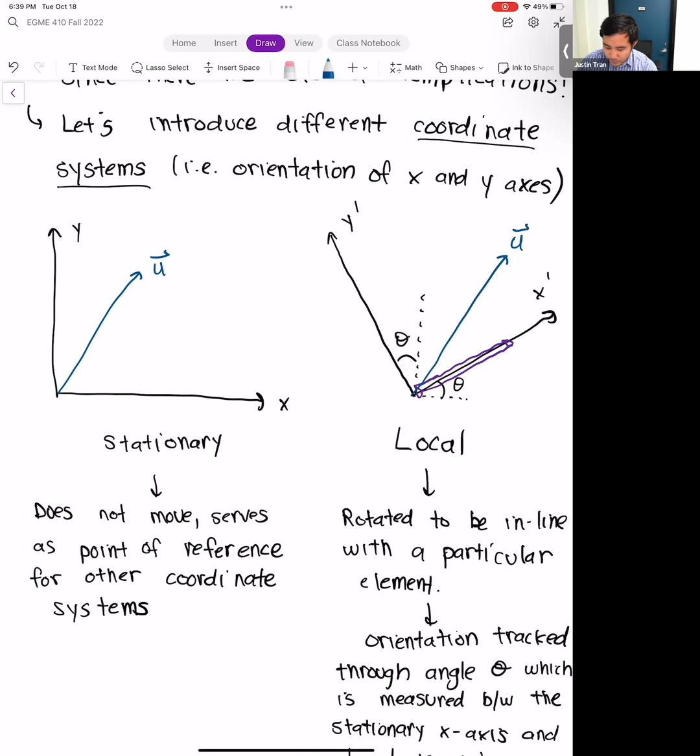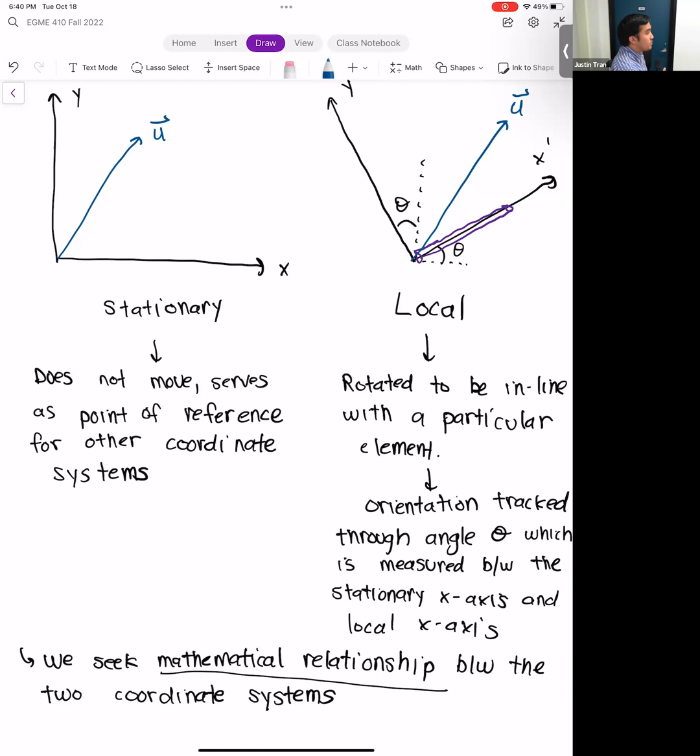If I were to take these two systems and draw a vector u here, and if I were to draw that same vector u in both coordinate systems, trying to draw it as identical as possible, it could be the exact same vector. But how we describe it in terms of its components is going to be different depending on the coordinate system. We can describe this vector in the stationary coordinate system, and we can describe it in the local coordinate system - it's going to have different components because the coordinate systems are different, but it's still the same vector. It all just really depends on your perspective.

This is another way to see this: we're looking at different perspectives. We're looking at the same things in different perspectives.

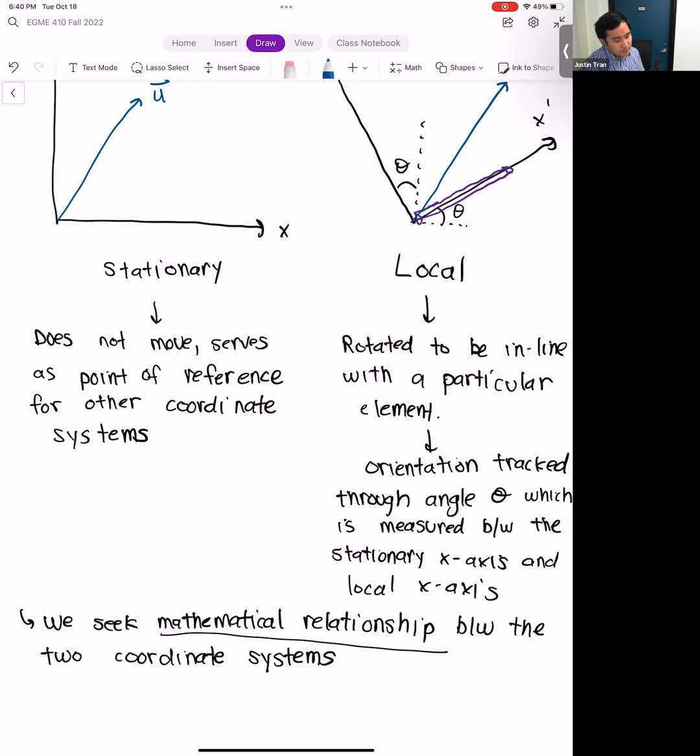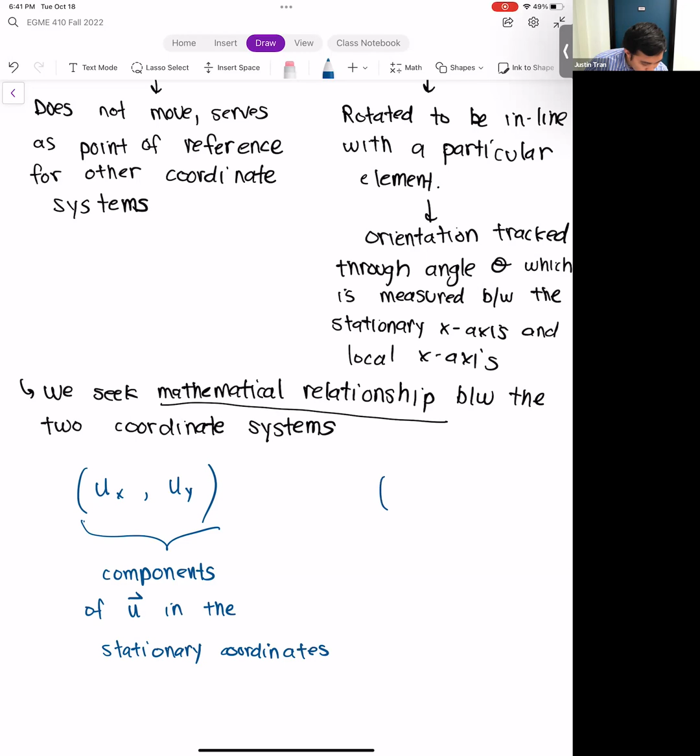One way we can say this is that we have ux and uy. These may be the components of u in the stationary coordinates. And then we also might have, what do I use? I use primes. So I'll have ux prime and uy prime. These are going to be the coordinates, or components, of the same u. If this u is exactly the same vector in both cases, then these two should be equal.

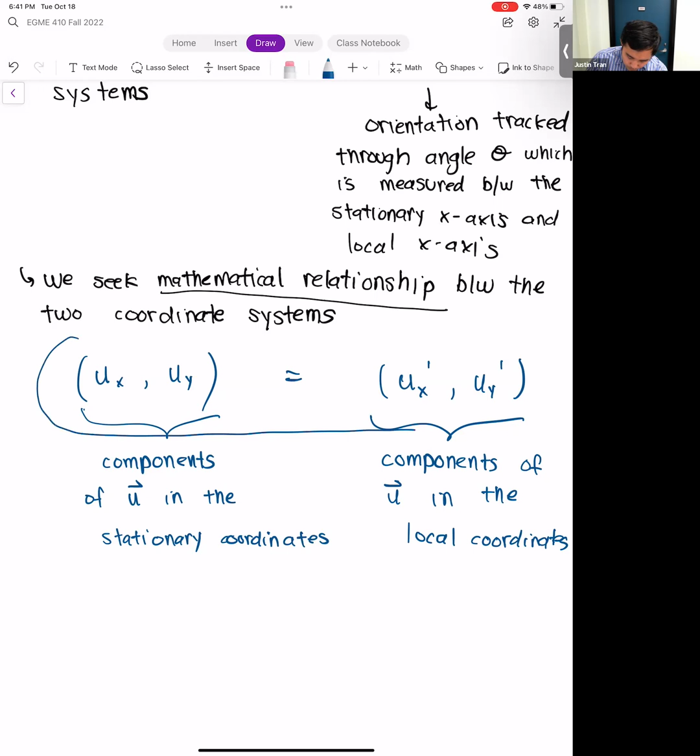So if we were to put this in vector form, we would say this is ux times i plus uy times j is equal to ux prime times i prime plus uy prime times j prime.

So obviously, ux, uy, ux prime, uy prime are going to be different from each other. And the thing that makes this equal is the fact that i is different from i prime, and j is different from j prime. So i and j here are unit vectors in the stationary X and Y directions. Meanwhile, i prime and j prime are unit vectors in the local X and local Y directions.

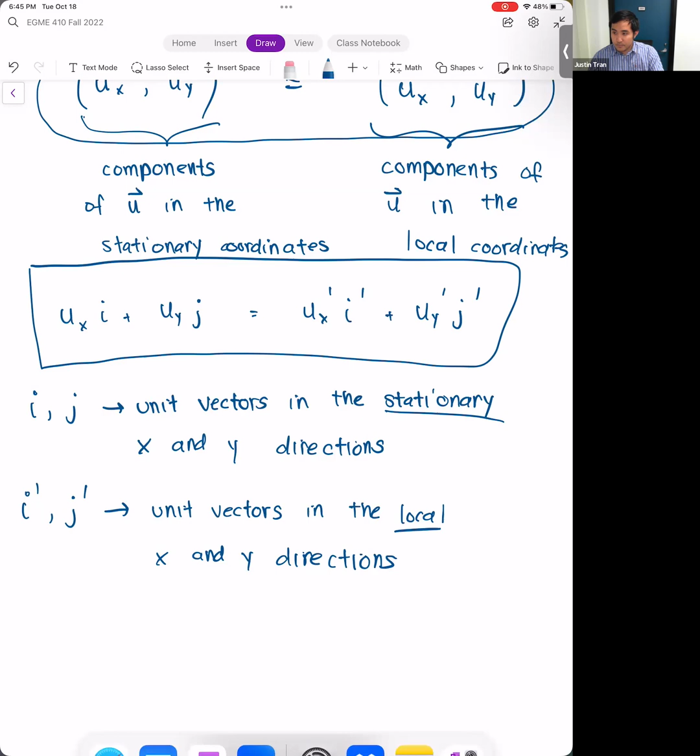Is there a good time I'm available to answer some questions about problem 7 on activity 4? Yeah, I'm free right now. If you want to, how long do you think it's going to take? Yeah, I can answer right now. You want to share your screen? Okay, let me go ahead and stop here. Okay, so you're free to share, Jaden.

Problem 7, if I recall, that's the one you do with solid elements, right? Yeah, so for that one, it's just try and see. Personally, I've never been able to do that one, and I always get an error whenever I try with solid elements. I think I was able to do it once maybe, but there have been some students who are able to do it. I think it depends on if your computer is liking you at the moment. So if you're running into an error for problem 7, just say you're running into an error, and that's generally the expected result.

So I chose this geometry. Okay, oh, okay, I see. Yeah, if you want to do it with solid elements, you do have to start over. So I would just create a separate project for it, upload the geometry again, and then just try meshing it. Yeah, you can try, but don't stress too much about it. If you're getting an error, that's what I get too, so that's the expected result. Yeah, if you're getting an error during the meshing, that's what I get too. So if you're getting an error, don't worry about it, that's what you should get.